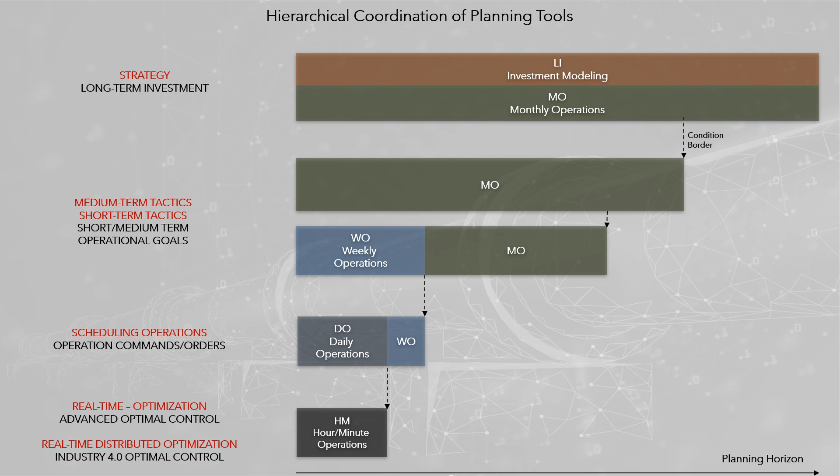From the point of view of mathematical modeling, hierarchical levels are intertwined and coordinated through the boundary conditions in time, and common modeling that can be shared. The modeling strategy of HAI is that all models of a decision support system can communicate with each other.

HAI Oil meets all the software solutions developed by HAI in different areas of application of mathematical optimization models, oriented to planning and to scheduling operations, in different business of the petroleum product supply chain.

Oil Enterprise-Wide Optimization integrates mathematical models for each of the links in the oil supply chain, in such a way to manage the planning of the supply chain with a holistic vision.

The design of HAI Oil EWO was the result of work done for a multi-business oil company. The union of models, and their coordination, forms the hypothalamus of an oil enterprise.

The current computational power allows detailed modeling of the supply chain, considering individually all the systems that compose it. This allows visualization of all the existing bottlenecks, and those that affect the maximization of economic gains.

All models developed by HAI, to support decisions in the oil industry, are interconnected through an information system. In this way the construction of the artificial hypothalamus is a question of joining the equations that make up the different models.

Oil Transport Systems Optimization corresponds to a general model, common to all types of oil products: raw, refined, natural gas and biomass, which represents the process for a specific system, including particular equations when this is required. It considers 2 types of transport modes: pipes and multimodal vehicles, like vessels, barges, train tanks, and/or truck tanks.

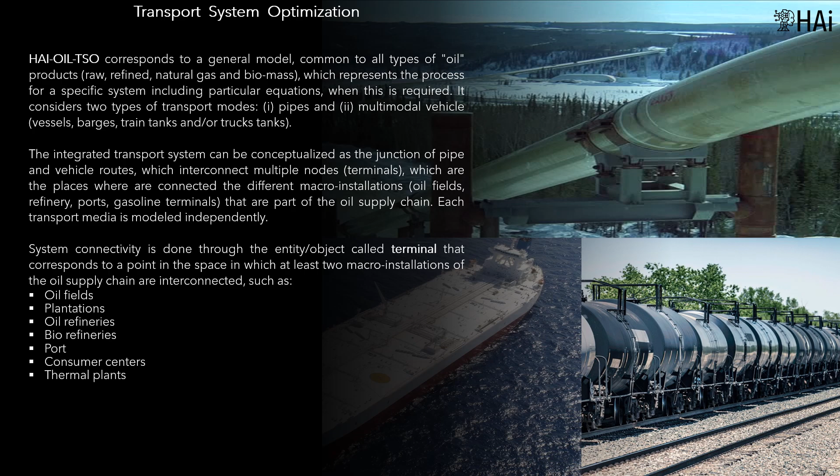Prescriptive analytics. To optimize are required the following models: the operation, dispatch, of the pipeline, at least one or two days in advance. This implies a real-time operating model, whose planning horizon is divided into periods of hours, fractions, which can be redispatched at any time, and the transport of hydrocarbons in relation to nomination, DRA dosage, energy consumption month by month.

This implies a short medium-term tactical operating model, whose planning horizon is divided into periods of weeks, fortnights or months, and that serves to adjust the pumping program, prior to the dispatch of the polyduct.

It is considered that the appropriate methodology for these models is mathematical programming, also known as exact methods. The other optimization alternatives are discarded for not being exact; they may produce unfeasible solutions, and they don't guarantee getting the optimal solution - they leave money on the table.

The results of the models, mainly the real-time ones, must feed the databases of the SCADA system, or distributed control. The image presents the IT architecture of the proposed solution. The mathematical models will be analyzed later. The methodology involves linking predictive and prescriptive artificial intelligence methods, to give rise to decision-making artificial intelligence.

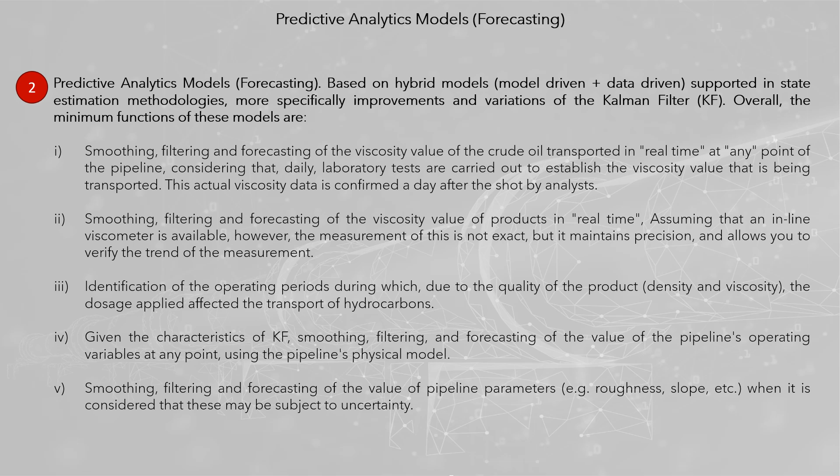Given the characteristics of KF, smoothing, filtering, and forecasting of the value of the pipeline's operating variables at any point, using the pipeline's physical model, and smoothing, filtering and forecasting of the value of pipeline parameters, e.g., roughness, slope, etc., when it is considered that these may be subject to uncertainty.

As a general rule, it is considered appropriate to use an extended Kalman filter, or a dual Kalman filter, to simultaneously estimate state variables, and the parameters of the equations.

Data-based algorithms only consider the database of observations, historical or synthetic, to determine the dynamic prognosis of the physical process. Normally, the related professional is a data scientist.

Model-based models are based on the numerical simulation model, which must be fitted by means of algebraic expressions, to be expressed as a system of stochastic differential equations, or finite differences, or finite elements. This requires an expert in the field of interest, in this case fluid mechanics, mainly in the transport of petroleum products.

The integration of the two approaches gives rise to hybrid predictive analytics, which can be considered as the appropriate method, that takes advantage of the mathematical knowledge of the physical system, and historical information. The most well-known method, and most used, for more than 65 years, is the Kalman filter.

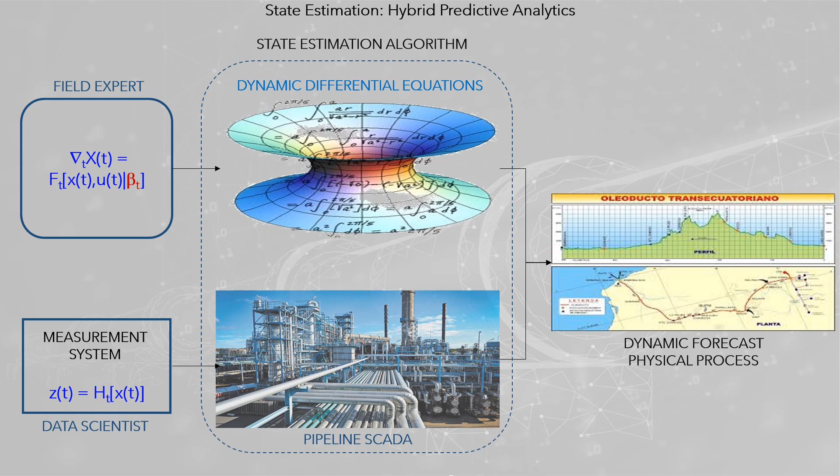The state estimate describes the system based on state variables, characterized by discrete, empirical probability distributions, and dynamic, empirical probability distribution functions that evolve over time.

Forecasting, predictions about the future, and filtering, predictions for the present. In a system under uncertainty, correcting the past may be just as important, if not more so, than forecasting the future and estimating the present.

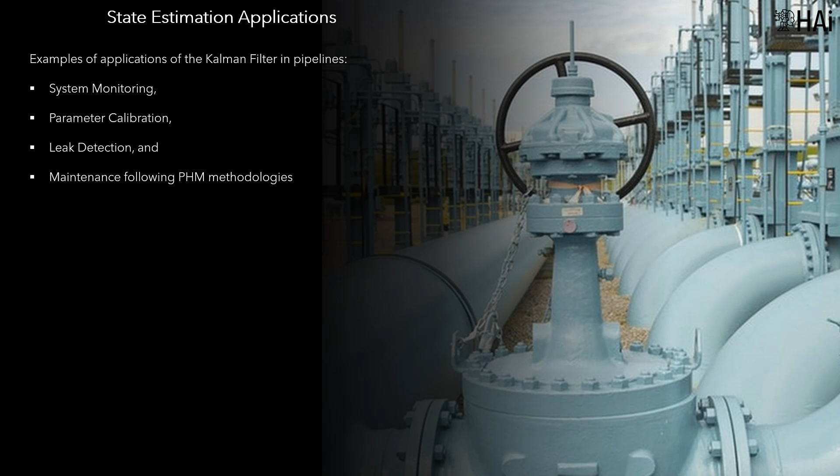Examples of applications of the Kalman filter in pipelines are system monitoring, parameter calibration, leak detection, and maintenance following PHM methodologies.

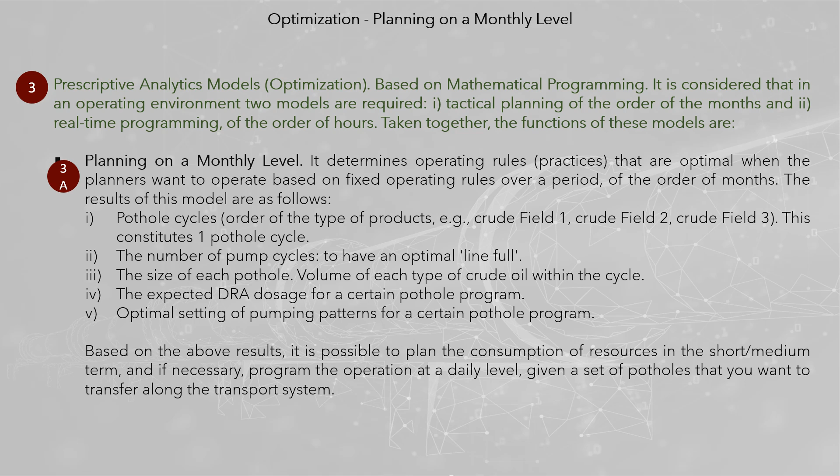Based on the above results, it is possible to plan the consumption of resources in the short-medium term, and if necessary, program the operation at a daily level, given a set of potholes that you want to transfer along the transport system. Daily scheduling determines the optimal operating conditions for a planning horizon of the order of days.

Specifically, it is expected to define operation schedules up to 3 or 4 days in advance. The results of this model are as follows.

Pumping plan at each pump station, optimal pump configuration pattern for the pump stations, and RPM at each pump. Contribution of DRA at injection points in each period of the planning horizon, and the flow and pressure variables along the pipeline, which can be visualized in the pipeline digital twin.

The two models share equations and processes and differ in the specific characteristics of monthly tactical and daily real-time planning. The objective function of the models may vary according to the criteria of the decision maker, such as minimize cost of operation, minimize energy consumption, and maximize oil products transfer.

The models, together or individually, can be used to support other decisions related to the operation of the transportation system. For example, supporting the ATP (available to promise) decision to accept or refuse transport of operational volumes for customers who request it without having a prior agreement.

To solve the mathematical problem of optimizing prescriptive analytics of a system, several approaches can be used: mental models, intuition and goodwill, simulation (physical model plus human reasoning), meta-heuristics, smart rationing, machine learning, experiences, best practices, and mathematical programming (physical model plus optimization mathematics).

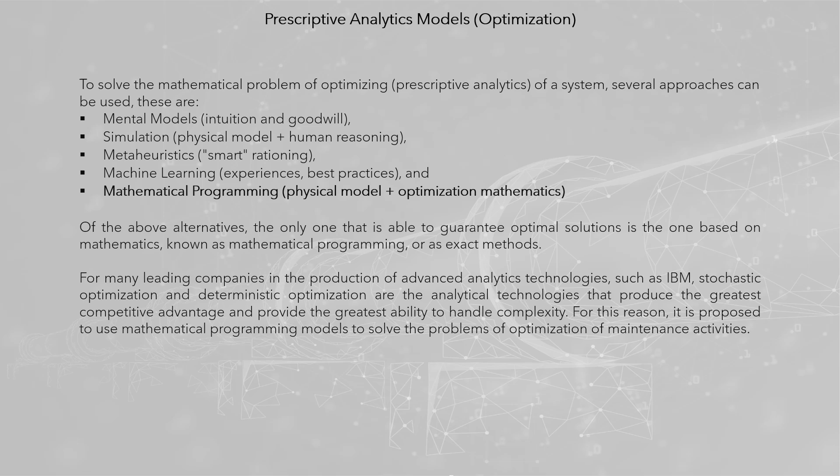Of the above alternatives, the only one that can guarantee optimal solutions is the one based on mathematical programming. For many leading companies in the production of advanced analytics technologies, such as IBM, stochastic optimization and deterministic optimization are the analytical technologies that produce the greatest competitive advantage and provide the greatest ability to handle complexity. For this reason, it is proposed to use mathematical programming models to solve optimization problems.

In decision-making, artificial intelligence mathematical programming may be considered the best of the breed. Pipelines planning and scheduling: compared to other transportation modes like road, railroad and vessel, pipelines are the safest and most economical way of conveying petroleum products over long distances, day and night.

During the last 2 decades, the operational multi-product pipeline scheduling has gained increasing attention. The problem of optimization of pipelines involves safe, reliable and economical operation, in which, for each moment of the planning period, the flows, pressures and configurations of the pumping stations must be determined, according to the different types of products that must be transported through the pipeline network.

The goal of the operation moves between 2 criteria: minimize energy consumption, an environmental criteria important to preserve the sustainability of the planet; and minimize the cost of energy, an economic criteria important in energy markets where rates change throughout the day.

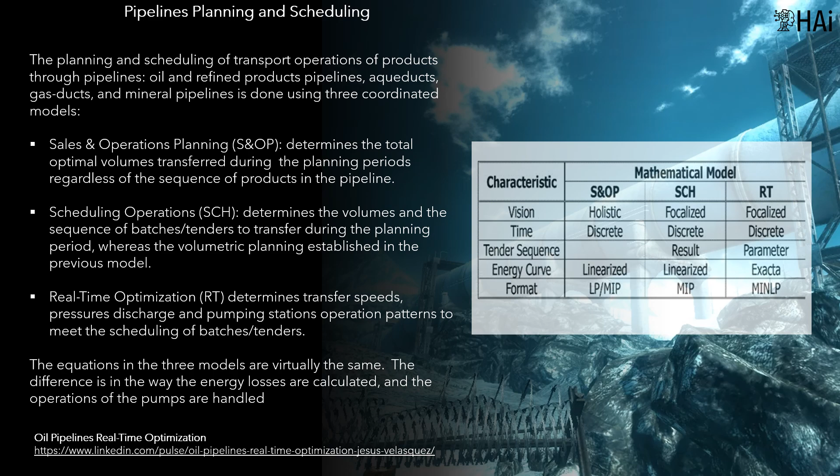Discrete time and continuous time modeling. There are two alternatives for modeling operations scheduling: discrete time models and continuous time models.

Continuous time modeling coordinates and details the beginning and end of all activities that are part of an operations plan. The conceptualization of modeling is generic, in the sense that it can be applied to any programming of detailed operations of a production system. The effort in modeling is greater than in discrete time and is less known by mathematical modelers. Its direct application is real-time models.

Discrete time modeling divides the planning period into periods, usually of equal duration, and determines the average conditions in which the production system must operate. This modeling is better known, and traditionally is used for tactical planning. If greater precision is required in the results, the duration of the periods must be decreased, which increases their number, which entails problems of greater dimensionality.

Any of the above methodologies may be useful in solving real problems. The suitability of its use is determined only after a detailed analysis of the matrix structure of the optimization problem is performed.

The real-time models include nonlinear modeling that determines the amount of energy consumed based on the flow of products in the system. In aggregated models, when multiple types of products can be transported in the pipeline, the total transport time must be divided into the time used to transport each type of product at different transfer rates.

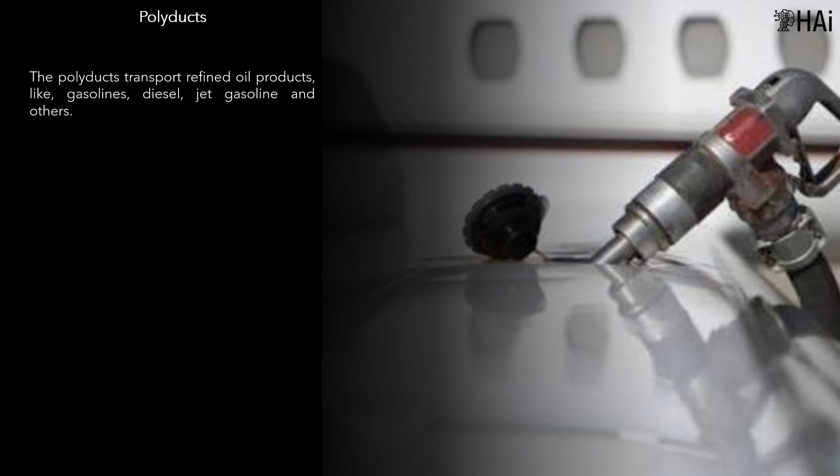Three types of pipelines exist: oil pipelines, which transport crude oil from oil fields and ports; polyducts, which transport refined oil products like gasolines, diesel, and jet fuel; and gas pipelines, which allow combustible gases, natural gas, and liquefied petroleum gas, to be transported on a large scale and over a long distance.

The optimization mathematical models for pipeline transport systems can be used with one of the following objective functions: minimum power, minimum cost, and maximum flow.

Optimization strategy. The problem-solving methodology must speed up the optimization process. The chosen method is based on problem breakdown for the different periods that make up the planning horizon.

The synthesis of the behavior of pumping stations by means of a convex hull for variables that synthesize their optimal operation as a function of pressure P and flow Q, for a given type of product associated with the batch, and coordination of the optimal solution using a Lagrangian coordination scheme.

The purpose of this is to iteratively solve significantly simpler problems that allow the original problem to be solved in significantly shorter computation times. After several analyses and numerical experimentation with mathematical models that represented the detailed problem, the following design principles are reached in order to make the solution of the problem viable as specified.

Split and decompose the problem into multiple problems of lower dimensionality in order to obtain the solution based on an iterative process. Maintain the format of the problems as linear or quadratic to take advantage of solvers specialized in this type of problem, and perform pre-processing of information in order to accelerate the solution of the problem, offloading unnecessary repetitive calculations from the optimization model.

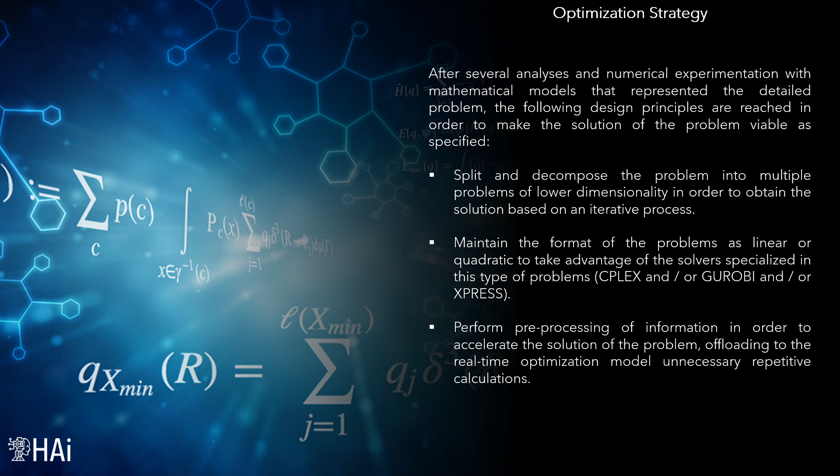Pumping stations modeling. In the oil industry and other industrial processes, pumps are divided into two general classifications: variable head pumps, or centrifugal, and positive displacement pumps.

Variable head pump types include centrifugal and turbine pumps, while positive displacement pumps include reciprocating and rotary pumps. The screw pump is one of the commonly used rotary-type pumps in the oil industry, and is mainly used in low-flow operation, where the efficiency of a centrifugal pump would be very low.

On the other hand, the versatility in handling high-pressure heads makes the centrifugal pump the most used in industrial applications. The effect of a pump on a system is to increase total energy.

The action and operation of a pump is defined in terms of its characteristic curves. These curves relate the capacity, or flow, of the pump, in volume units per unit of time, versus the discharge pressures. The equation that represents this ratio is obtained from the characteristic curve of the pump, which is provided by the manufacturer.

This curve is generated for a pump rotation speed and for a characteristic viscosity of a reference product, usually water. This implies that, to determine the coefficients of the actual pumping curve, it is necessary to adjust the coefficients of the characteristic curve, based on the viscosity of the fluid that is pumped.

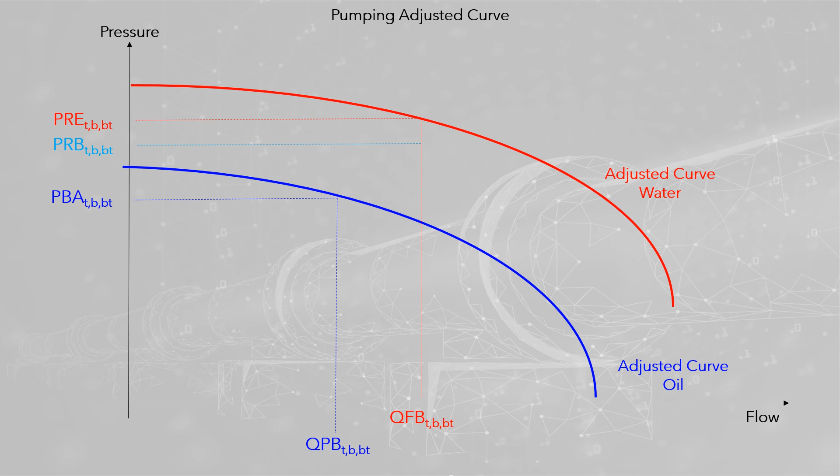If the pump rotation speed changes, adjustments must also be made to determine the actual operating conditions of the pumping station. When a defined flow is required, and knowing that the system curve varies, it is necessary to affect the pumping curve, and thus find a new point of operation that meets the flow and pressure needs for the system.

The relationship is exponential, implying diseconomies of scale in energy consumption as a function of flow. In theory, the pump has no limit in flow, but for an infinite flow rate, it would require infinite energy.

On the other hand, it is normal that there is a minimum flow rate so that the pump begins to operate. The curves depend on the product transported. To the extent that it is heavier, denser, more power is required for the same flow. This applies to petroleum and petroleum products, that is, the curve depends on the API grade.

A pumping station is composed of multiple pumps, usually of the same type. While the atom of the system is the pump, it is necessary to analyze the behavior of the station as a machine, whose function is to pump a product to a certain transfer rate, and at a given pressure.

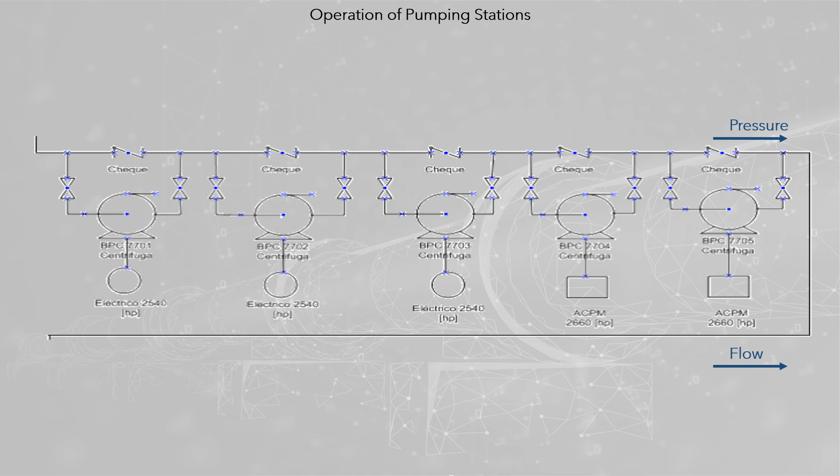The pumping curve is determinant of the operation of the pumping stations. A way to affect the pumping curve is by setting up a pumping pattern, at a pumping station where there are multiple pumps. Configuration shapes are 2: in parallel, and in series.

When more than one pump is configured in parallel, the system receives higher flow rates, the sum of the individual flow rates of the active pumps, at the same pressure level. When 2 or more pumps are configured in series, the system receives greater pressure, the sum of the individual pressures of the active pumps, at the same flow level.

There are multiple operating patterns to configure the pumps of a pumping station. Its discrete character implies that selecting the more convenient one corresponds to a combinatorial mathematical problem. An aspect to consider is related to the type of pumps and the operating restrictions of pumping systems.

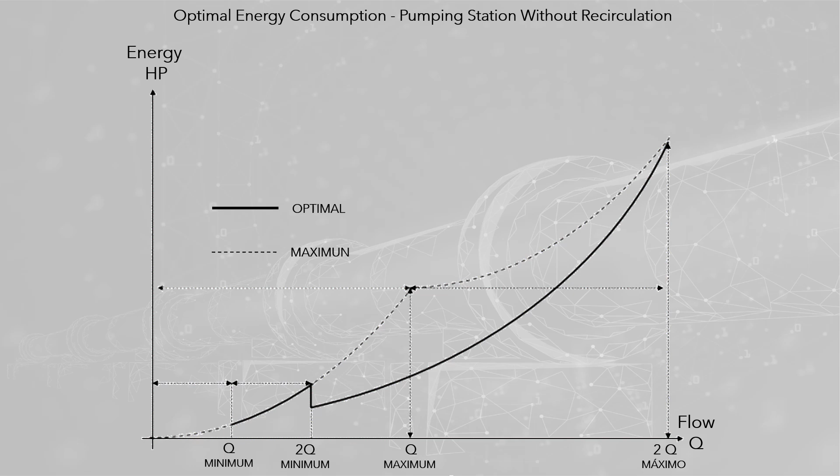If the pumps are operated in sequence, as much energy as possible will be expended. This behavior involves a discontinuity in the optimization model which must be handled carefully.

The behavior is different with fixed pumps, as they cannot regulate the minimum flow rate, and must lose energy in a dissipating valve, that allows excess energy to be released. The 2 cases involve non-convexities in the optimal consumption curves.

The graphic shows the optimal energy consumption versus flow rate for the station pumping heavy oil, for the 30th station pumping heavy oil.

It can be noticed that the flows that force the ignition of a new pump generate a discontinuity in the curve. This complicates the solution of the problem, since for such flows, the curve has 2 values. A fundamental aspect of optimization models is the definition of the feasible zone. In most problems this is not complicated.

The graph presents the feasibility zone when the operation pattern is in parallel. The graphic shows the feasibility zone of 20 pumping stations, operating in parallel, pumping mix oil.

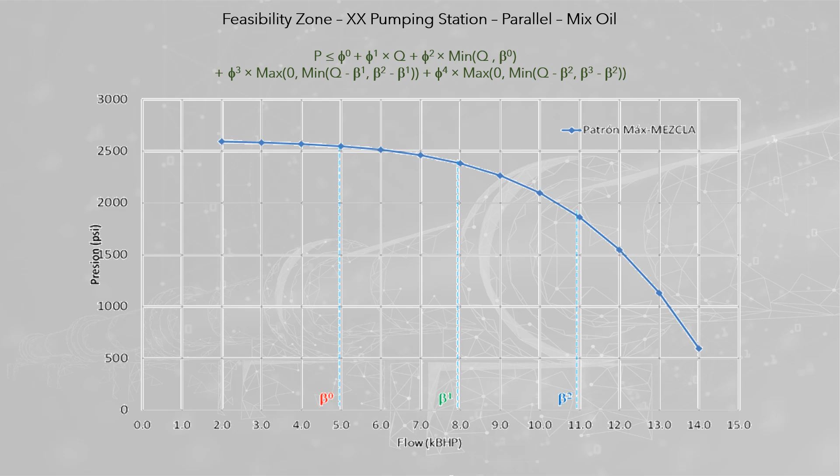Given the non-trivial form that gives rise to calculations, to represent the pumping feasibility area, the pump curves can be replaced by an algebraic function based on parameters, estimated through a least squares model. The polynomial function, or directly the empirical function, may be approximated by a piecewise linear function. For each pattern and product, the feasibility zone is linearized, based on the hyperplanes that support the continuous feasibility zone.

The graphic shows the feasibility zone of 20 pumping stations, operating in parallel, pumping mix oil. Now, the graph includes the linearized feasibility zone for pumping heavy oil. It is easy to notice that the area of operation for pumping heavy crude oil is more limited than for crude mix. The graph shows the maximum limits set by the extreme pumping patterns, which are assumed to cover the remaining pumping patterns.

And it defines the non-convex feasible zone for the pumping station operation. If the restriction is viewed as disjunctive programming, it has two convex disjunctive zones, since the pumping pattern is parallel, or is serial, but not both. This seems to be the most appropriate, from the point of view of mathematical modeling.

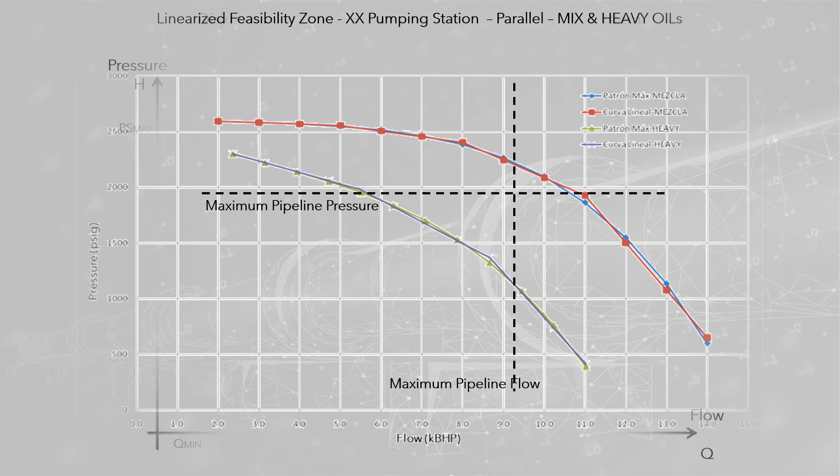The above feasibility zone must be intersected with the restrictions imposed by the pipeline, usually maximum limits on flow and pressure. The graph includes the limits in flow and pressure, due to the pipe. The rectangle determines the feasibility zone for the pumping of mix oil. This indicates that the limitations in the pumping of mix oil are due to the pipeline.

In the case of heavy oil, there are limitations due to the pipeline, and due to the pumping station. The operation of a station is determined by the following decision variables: pump configuration, in series or in parallel; engine speed, RPM; and flow rate and pumping pressure.

The configuration of the pumping stations is a central part of the decision-making process as, depending on the pumping pattern, the combined action of the patterns makes it possible to meet the flow pressure demand in multiple ways. The optimization requires a detailed hydraulic model, at the level of each type of pump used in the pumping system, and for each type of product being pumped.

Considering the integral optimization of the entire pipeline, using large-scale optimization methodologies, partition and decomposition, the operation of each pumping station must be optimized through a mixed integer linear programming model, MILP, that minimizes the amount of energy required to dispatch a batch QP, for each type of oil.

Associated with each point of the grid, the following data is stored in an optimization database: the optimal consumption, the operating pattern that produces it, and the dissipated pressure in the valve, unused available energy, and the RPM of the variable speed motors.

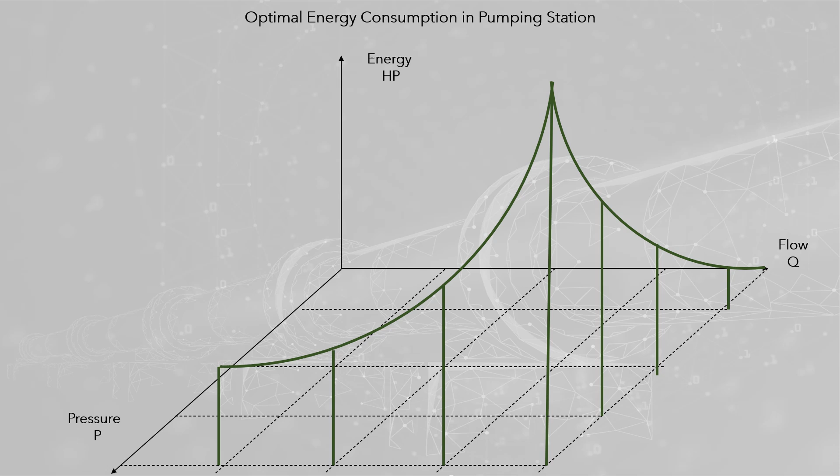The problem of determining optimal energy consumption in a pumping station is a relatively simple problem, but complex to solve, due to its combinatorial character.

The image shows the grid of optimal operating policies for any pumping station of the system. To build it, the flow and pressure are discretized, and the problem of optimizing the operation of the pumping station, for each QP pair, for each product that flows through the station, is solved.

To obtain a continuous solution, a convex linear combination is used, based on the 4 points that limit the polygon to which the solution belongs. It is an approximation. This process works well for the case where all 4 points use the same pumping pattern. If this is not the case, it should be analyzed how to resolve the situation.

The grid corresponds to a hull, convex or non-convex, which represents the optimal solutions of the operation of the pumping stations, as a function of the product, the pressure and the flow. If the envelope is convex, its incorporation into other models generates linear constraints. If it is non-convex, it implies the inclusion of binary variables, and will generate an MIP problem.

The integrated optimization of pipeline systems requires that all the pumping stations must be considered jointly. For real systems, it becomes a highly complex mathematical problem. For this reason, it must be faced using large-scale optimization methodologies, based on the partitioning and decomposition of the problem.

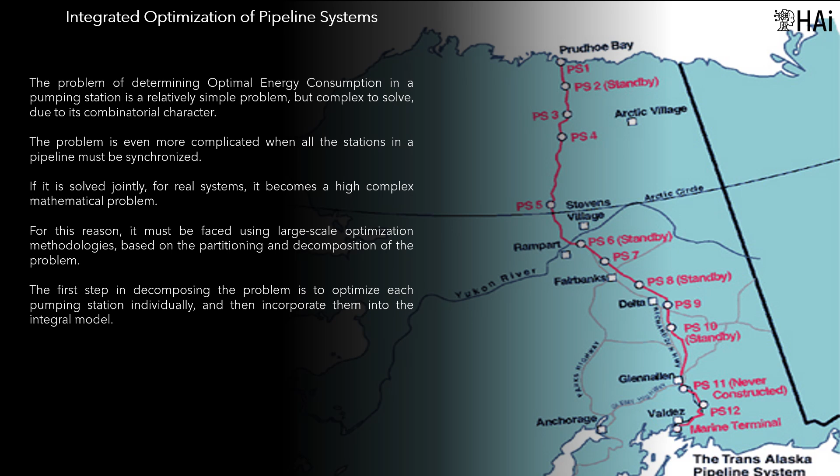The monolithic approach for oil pipelines optimization seems to be an impossible way, since the combinatorial character of the problem can make it impossible to solve in reasonable times.

The first step to the decomposition of the problem is the generation of the convex hull of all pumping stations. This process involves extracting from the monolithic model the model of the pumping stations. Using this model, convex hulls will be produced.

The results of the process must be stored in a database for later use in the pipeline system optimization model. The integral model must incorporate the equations that allow working with the convex hull to determine the flow and pressure for each product that flows through the piping system.

The process of generating the convex hull can be done offline, prior to the use of the optimization model. If the APIs of the products are constant, as in the case of refined products, the convex hull can be used for multiple runs of the optimization model. When it changes frequently, new convex hulls must be generated as products with new APIs appear, as is the case with crude oil.

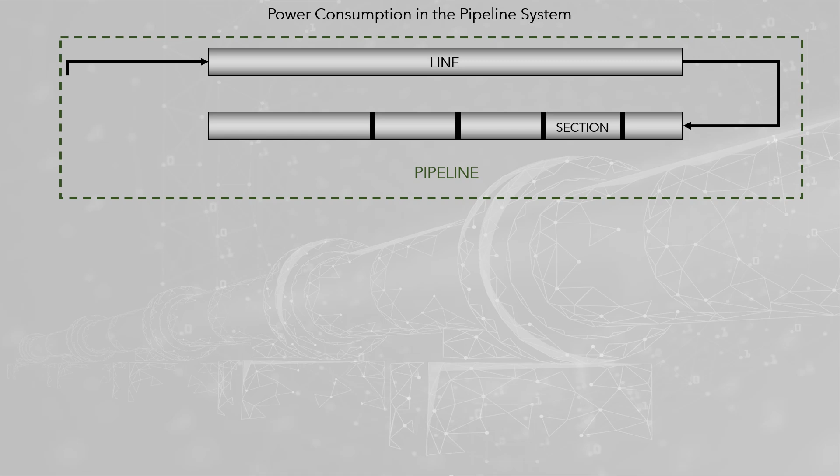Pipelines energy modeling. A pipeline consists of sets of lines. The lines join two main nodes of the pipeline: pumping stations, and product terminals where there are storage tanks. Lines are composed of sets of sections that join nodes. Each section has its own physical characteristics: slope, rugosity, thickness, length. The main nodes are characterized by the industrial infrastructure located on the node. All nodes are linked to a geoposition in the terrain.

The batches begin to flow along the first section of one line of the pipeline, and must therefore be linked to the line through which they enter the system. The matter and the energy continuity equations must be met on all sections and nodes.

The above concepts should be related to the operation of the transport system, using variables that determine for each period the position of the batch, which may be occupying several sections of one line, or several lines. The possibility of shutdown of the system, non-operation, zero flow, or of a pumping station, is also considered as a decision in the model.

In general, the study of pressure loss in a duct system indicates that there are three effects that produce the pressure drop: friction, gravity and acceleration. The most important effect for the behavior of pressure losses is that of the operating flow, which must be added to the pressure losses due to gravitational action and friction, which depend on the density and viscosity of the fluid. The acceleration effect in many cases is assumed to be negligible.

As fluids of different characteristics, viscosity and density, enter the pipe, the work to be performed for transport changes, represented by the required pressure. This can be viewed graphically using the pressure loss representations as a function of the flow, called system resistance curves. These curves reflect the behavior of the pumping head required for a given flow rate.

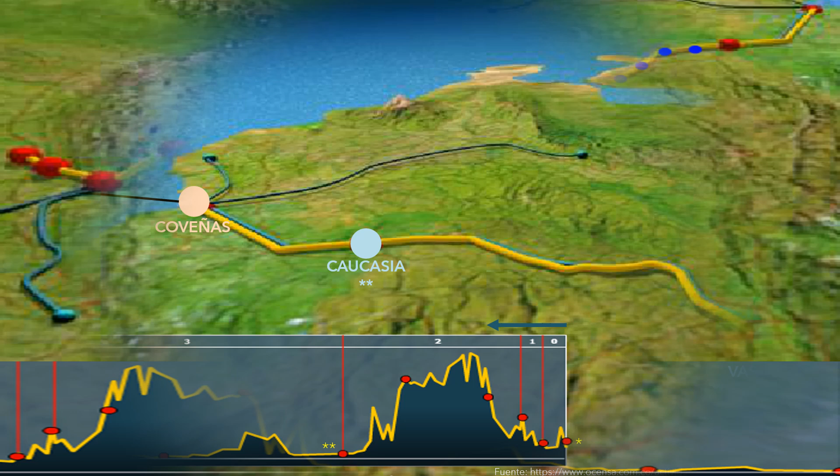The pipeline height profile is a determinant of the energy required to transport a certain volume of a specific product, at a certain transfer rate.

The energy losses in the sections depend on their characteristics, the type of product, and the transfer rate, or flow. They are independent of the profile of the pipe. Energy losses as a function of flow are exponential.

The energy generated by the pumping stations provides the energy required for the transport of the products, to the extent that the energy that is in the pipeline is consumed. The energy profile in the pipe must always be positive, so that the product can flow.

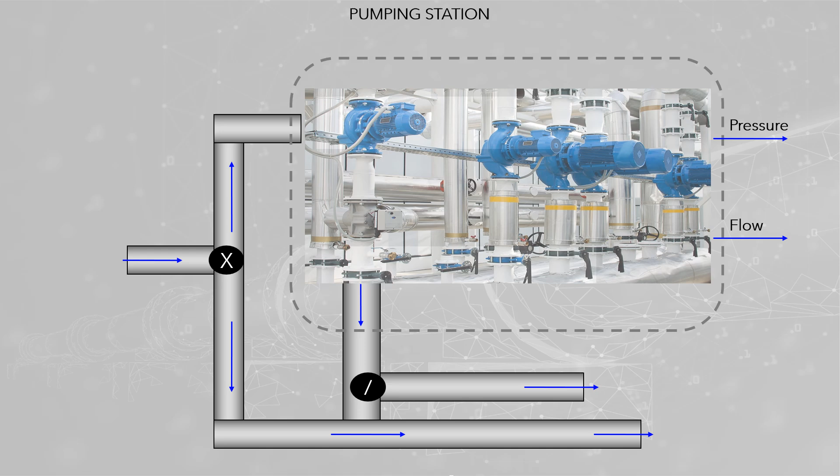Integration: the modeling of pumping and pipeline flow. There are multiple topologies to connect the pumping system to the pipe system. For real-time operation, this connection is very important. For tactical planning, it is less important, and may be approximated.

Optimizing batches sequences. The objective of modeling is to determine the sequence of batches that should flow in the pipeline. For discrete time models, the result is a matrix, sections by periods, which indicate the batches that occupy each cell of the matrix.

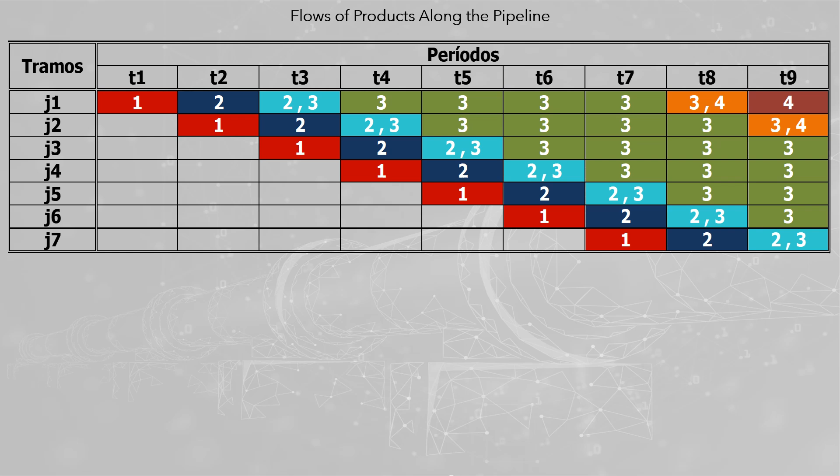This implies that the mathematical model must establish the energy loss curve of the mixture, considering the operation of the pipeline, as presented in the diagram. Experiments conducted by HAi indicate that a linear combination, weighted by the volume of each product, is appropriate.

Optimizing batch sequences. The batch sequence optimization problem is complicated by its combinatorial character, with precedence constraints. Precedence restrictions reduce the domain of combinatorics, since they do not allow all combinations. This facilitates the solution of the problem but leads to greater complexity in modeling.

An example of this type of constraint is one that does not allow a product of lower quality and cost, like kerosene, to go in the batch previous to a product of high quality, like jet gasoline. This prevents contamination of products. These problems are of the MIP type, and can be solved by mathematical programming, or by constraint programming. HAi has selected to work with mathematical programming.

Temperature impact optimization. Impact of temperature in pumping oil products. Due to seasonal variation, the average line temperature may change in time and space. As shown in the next images, viscosity of crude oil is a strong function of API gravity and temperature. This affects the amount and cost of energy, and the transport capacity. At very low temperatures the system may stop operating.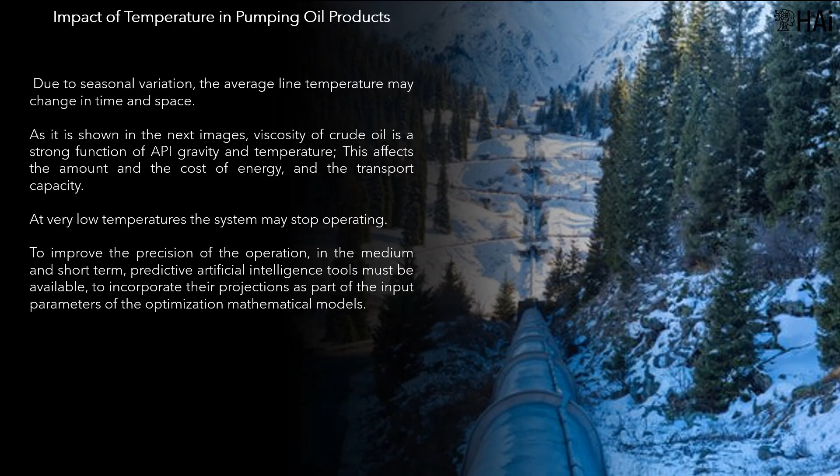Variation of crude oil viscosity with API and temperature. The figure shows that oil viscosity decreases as temperature increases. Lower viscosity results in higher Reynolds number, therefore the friction factor decreases.

Effect of temperature on total pump power requirement. The analysis indicates that for an oil pipeline, the pumping power requirement varies as the crude oil degrees API changes. Increasing line average temperature reduces the crude oil viscosity. The reduction of viscosity results in higher Reynolds number, lower friction factor, and in effect lower pumping power requirements. An 8 degree Celsius temperature difference can imply about 25% difference in energy consumption.

This impact is not limited to pipelines, it also affects production fields.

Drag reduction optimization. Drag reduction is a physical phenomenon that causes friction to be reduced, and fluid flow to be increased. Chemicals that reduce drag are known as drag-reducing agents, DRA. Several polymeric compounds can reduce the wall shear stress of flowing liquids at low concentrations. Thus, the use of DRA has the following advantages.

Increased pipeline capacity, the throughput. Savings in pumping power. Pressure reduction with associated reductions in pipe thickness, and pressure surge, and reduction in pipe diameter in the design phase, as well as the number or size of pumping facilities.

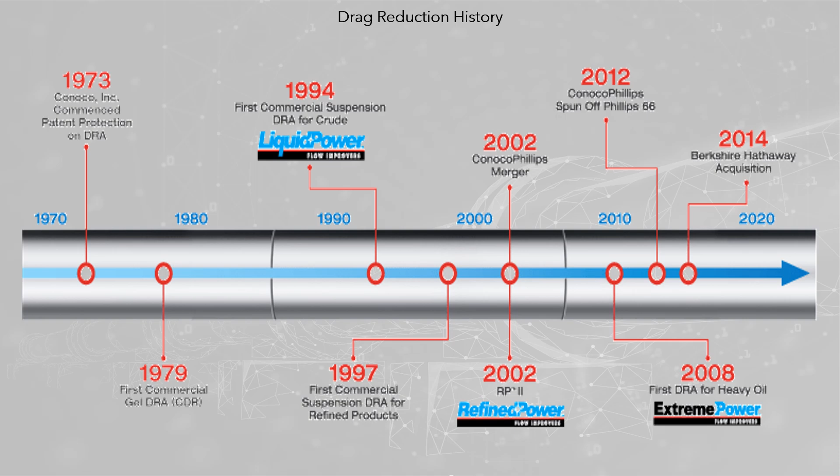This drag reduction optimization involves an empirical, experimental process to determine the variations in operating conditions, pressure and flow, considering the conditions of the pipeline and the pumps, and the impact on the operation of the concentration in weight, and volume, of the type of DRA used.

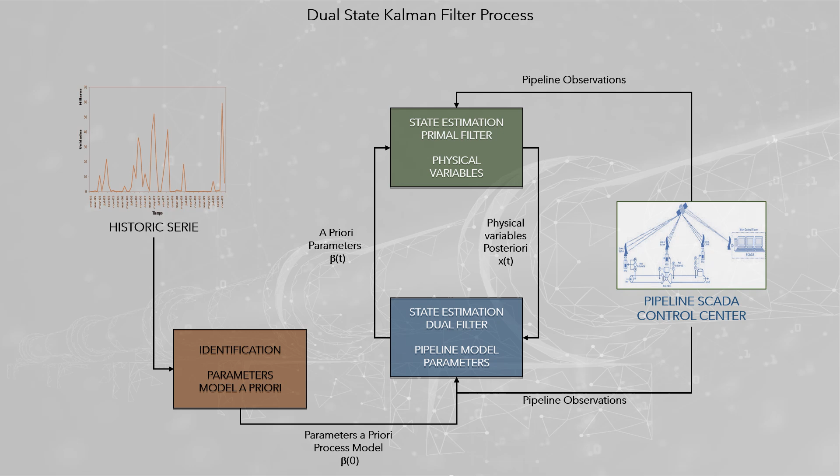To do this, a model of the pipeline, a digital twin, must be built considering the theoretical mathematical equations of the flow, and validate them with controlled measurements, using a model supported by artificial intelligence. HAi suggests a model based on the dual-state Kalman filter. The image presents the connectivity of a state estimation model, as part of the DRA function parameter estimation process. This is because there are no exact equations for its description.

The benefits of DRA optimization are: increase pipeline throughput, reduce energy of pump stations, reduce pipeline flow friction, reduce carbon emissions, reduce operation pressure, save energy costs, increase technical and economical productivity, and increase transport capacity, then avoid construction and expansion of pipelines.

Pipeline digital twin. The concept of the digital twin is associated with cyber physical systems, and provides an innovation that will bring a new look to industrial automation.

However, the basic concepts of digital twins are old and date back many years, in which models of differences and finite elements were used to build simulators of industrial or natural processes that would serve to support decision-making, and to validate the knowledge that we have of the process of reference.

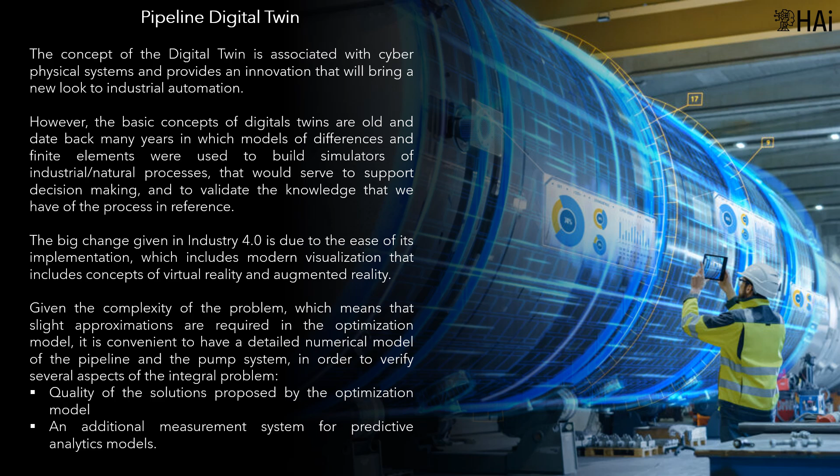The big change given in Industry 4.0 is due to the ease of its implementation, which includes modern visualization that includes concepts of virtual reality and augmented reality.

Given the complexity of the problem, which means that slight approximations are required in the optimization model, it is convenient to have a detailed numerical model of the pipeline and the pump system, in order to verify several aspects of the integral problem: quality of the solutions proposed by the optimization model, and an additional measurement system for predictive analytics models. The image presents the connectivity of a digital twin to support the state estimation and optimization models.

In the past, HAi has built, in Excel, pipeline simulation models that maybe support the digital twin of an oil pipeline. Politic tactical planning. HAi framework.

The following graphic, taken from Rejowski and Pinto, 2005, illustrates the problem of planning politics, which has two fundamental aspects: sequence of batches, and hydraulic conditions.

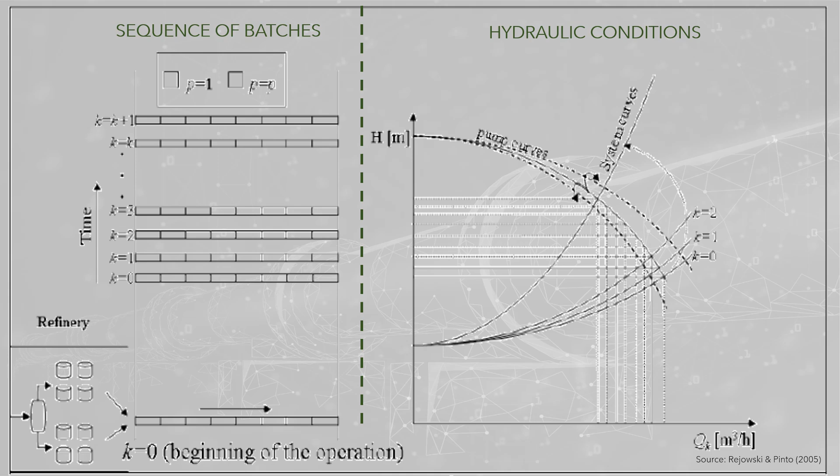Along the polyduct, the planning of a polyduct aims to determine goals, not transport orders, for the transportation of oil refined products in the medium term, that is, in the order of weeks or months.

The results sought are defined goals for the sequence of batches to be dispatched, and define their technical specifications: volume, transfer rates, and DRA injections.

The time period of departure and of arrival of batches. The level of inventories at each terminal linked to the pipeline system. The operation plan of the pumping stations, and the minimum cost of the operation of the system.

The complexity of the problem of programming the sequence of batches in a polyduct is evident, since it corresponds to a combinatorial problem that involves binary variables to coordinate the assignment of sequences to the different batches, which defines a MIP problem with NP-hard complexity.

If the transfer rate is considered as a variable, the problem will become a MINLP problem, which further complicates its solution. Three fundamental aspects must be considered in modeling: the nonlinearity that is generated in the movement of the batches,

the nonlinearities in the pumping stations, which may be non-convex, and the rules that must satisfy the sequence of batches of the different products. Not all combinations are allowed.

HAi's criterion is to maintain the model as a MIP optimization problem. In the movement of fluids in the pipeline system, the fundamental nonlinear equation defines that time of the displacement is equal to the volume transferred divided by the flow rate.

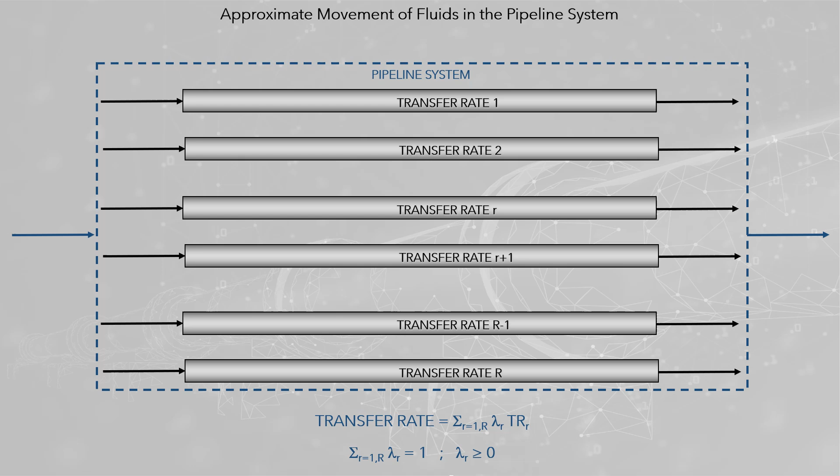The lambda multipliers represent the fraction of the time during which the line operates at the associated flow. The approximation must be made for each line and applies to all sections that are flowing in the system during period t. This approach is appropriate when speed is required to obtain an approximate optimal solution, near to the real optimal solution.

It is the case of tactical planning, but it is not the case of real-time scheduling. The HAi proposal for pumping station operations is to model the pumping system using a convex hull, calculated offline, which corresponds to a linear model.

For those parts of the pumping operating system which involve discontinuities, and therefore nonlinearities, it is suggested to make approximations which guarantee convexity. Planning based on previous experiences.

Discrete formulation of continuous process. Due to multiple limitations that existed in the past, for example, limited computing capacity, optimization algorithms in the process of growth, lack of knowledge of high-performance optimization methodologies, and difficulty formulating complex math problems.

Approximate models were generated based not on an exact mathematical formulation, but aimed at selecting one, or a combination of solutions, proven, whose greatest quality is that they guarantee feasible solutions. For those old years, that was a wise way to face the problem.

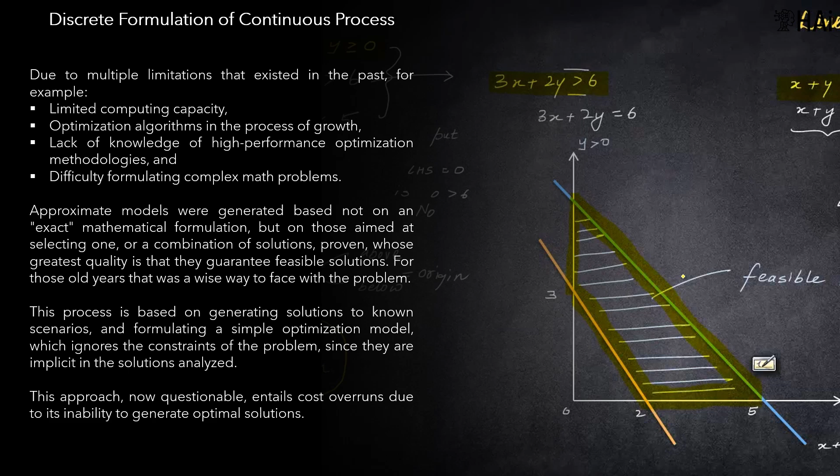This process is based on generating solutions to known scenarios, and formulating a simple optimization model, which ignores the constraints of the problem, since they are implicit in the solutions analyzed. This approach, now questionable, entails cost overruns due to its inability to generate optimal solutions.

To analyze the impact of this approach, consider that the green shaded zone represents the real feasibility zone of a continuous process. If a discrete formulation is used, that is, discrete solutions are assumed for continuous variables, the real feasibility zone will be reduced, affecting the optimization, so that the profits provided by the model will be seriously reduced, being able to reach zero.

In the case of using a single solution, there will be no optimization, and the feasibility zone will be reduced to the point of the formula used.

In the case of using two solutions, the feasibility zone will be reduced to the line that connects the two points that represent the formulas used. The solution shall be a point on the line that determines the convex linear combination of the two formulas.

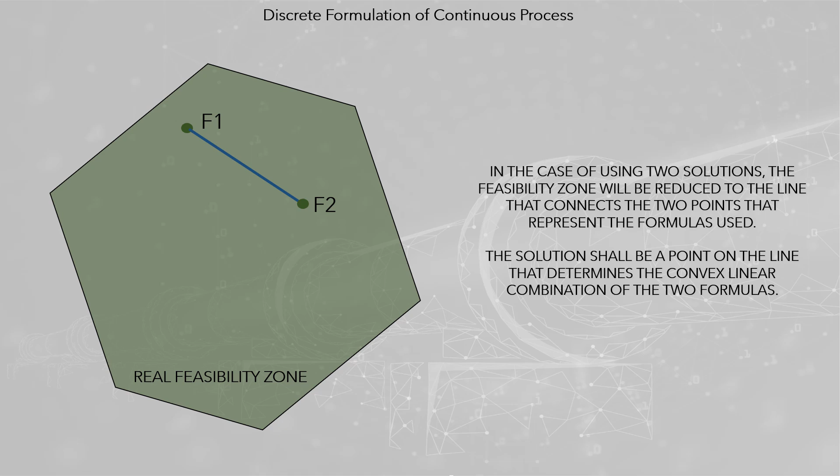In the case of using three or more solutions, the feasibility zone will be reduced to an area delimited by the points associated with the formulas. The solution will be a point inside the modeled feasibility zone, which can be expressed as the area containing all the convex linear combinations of the formulas used.

To the extent that discrete solutions are incorporated, the modeled feasibility zone will approach the real feasibility zone. The quality of the approximation depends on the coverage made by the discrete formulas of continuous space, something similar to what happens in the design of experiments.

A greater number of points does not provide more information if they fall into the area defined by the convex linear combination, defined by the extreme points of the historical sample. No more points are required, more coverage is required.

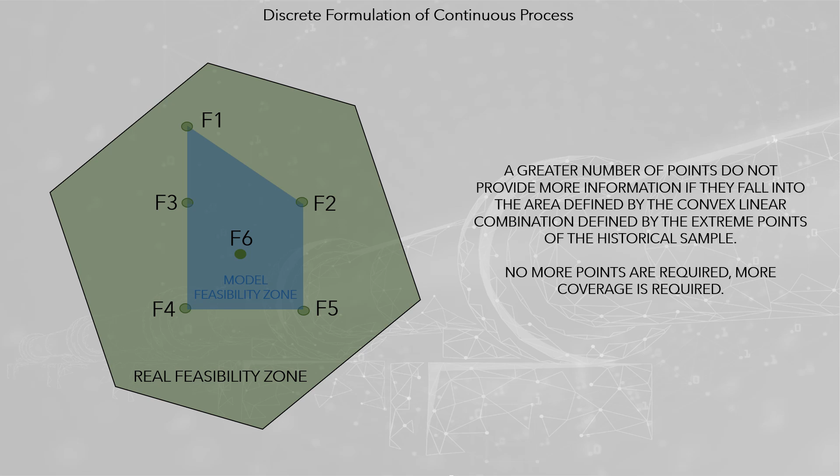In any case, the representation based on discrete formulas generates suboptimization, due to a smaller feasibility zone than the real one. There are large-scale optimization methodologies, such as Benders theory, which starting from an approximate feasibility zone are forming the real feasibility zone, to achieve the optimal solution.

In this case, the solutions that should be incorporated are generated by an artificial intelligence based on mathematics, and not on the practices, or the mental models, of humans.

In concrete terms, suboptimization implies lower ROI captured by mathematical models. Saving a little money in mathematical complexity but leaving important money on the table. It is a bad business.

Case: optimization of scheduling of multi-product pipeline and depot inventory. The following is the summary of the paper, Simultaneous Scheduling of Multi-Product Pipeline Distribution and Depot Inventory Management for Petroleum Refinery.

The scheduling model consists of three submodels: a pre-processing submodel for regulating new feeding pipeline slugs, a TM handling submodel, and a product pipeline distribution submodel with consideration of depot inventory management. The MPD DIM could handle the mixed interface of oil products appropriately and economically through blending and distillation operations. Meanwhile, the optimization of multi-product pipeline transportation and depot inventory management could be simultaneously accomplished.

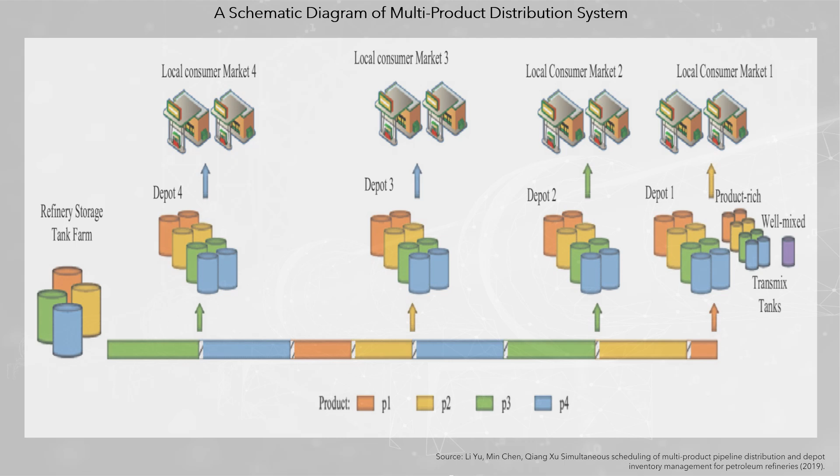The efficacy of the methodology and MPD DIM model has been demonstrated by 6 case studies. The image shows a schematic diagram of multi-product distribution system. Continuous time modeling corresponds more to a scheduling model than to a planning model.

The integrated planning of a pipeline system that links different streams in the oil chain is the central part of the enterprise-wide optimization of an oil company. For a petroleum products transportation company, its business may be to efficiently transport petroleum products. But it can become more profitable, not to transport them.

This is related to the definition of which is the product that is transported and marketed: oil and derived products that are physically transported, or the technical specifications that are transported in the products.

Natural gas transport is a good example. All natural gases have different energy content. What is used in thermal power plants is energy. Natural gas is a medium that contains energy. Commercial agreements are made on quantities of energy, and not so much on volumes of gas.

The technical, commercial characteristics of the product depend on the type of oil product that is moving along the pipeline, and the blending of these products in the terminals of the pipelines.

It could be the case of moving a product to a terminal, to complement the technical specifications of the existing products in the terminal, mix them and deliver them to the customer, depending on the commercial transaction.

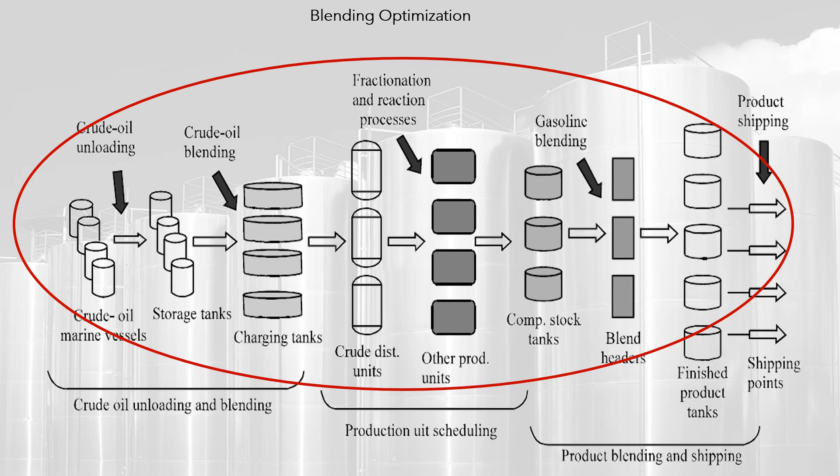The model blend allows to plan transportation operations for multiple oil production systems, with a view to delivering crude oil blends to refineries and/or ports that are connected to the system. The system accepts any type of connectivity topology between facilities.

The supply of oil is given through fields producing different types of crude oil, with a predefined availability. This offer can be defined dynamically, considering the evolution of the oil-producing fields' operations plans. It is also possible to consider buying crude oil in the spot market.

The demand for commercial crudes occurs in refineries and export ports. It is possible to buy crude oil in the spot market, in order to mix them and obtain new commercial oils. It can also be considered purchases or sales of oil futures, which must be respected.

The purpose of optimization is to determine the optimal operation of the system, in such a way as to maximize the utility produced, or to minimize the costs of satisfying a predefined demand.

A terminal can be conceptualized as a machine that takes multiple oil crudes, mixes them, and produces multiple blended crudes. There are also, at the end of the refinery, terminals oriented to handle the finished products and their blending. The image presents an example of the blending equations.

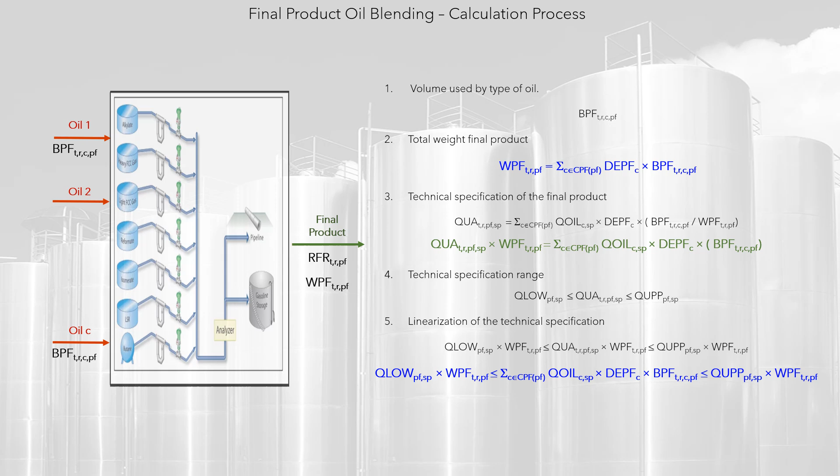The features of this system are: oil is produced in the production fields, each field being characterized by the type of oil it produces. Such oil must enter the oil distribution system that feeds export ports, through which commercial commitments to sell oil in the spot market, or the financial markets, or directly to the refineries.

Optimizing the blend of crude oil and petroleum products is a multi-million-dollar application. It can be coupled to the production of oil fields, in such a way as to establish optimal plans for production, distribution, export and import. In addition, blending processes extend to petroleum products, for example, lubricants.

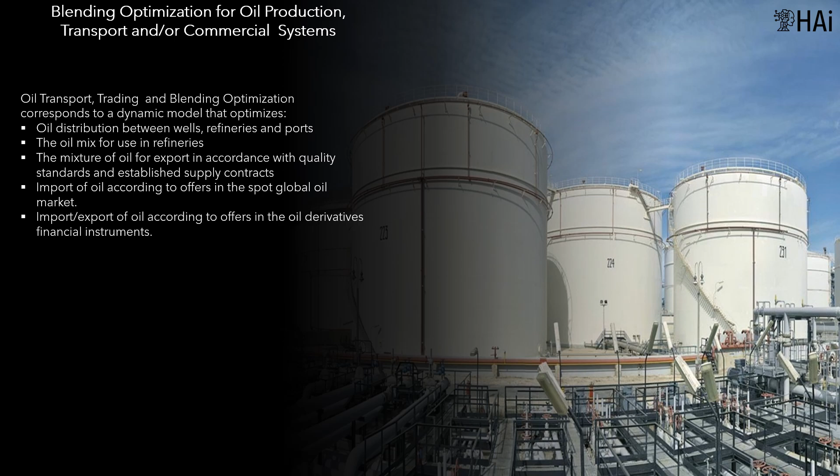Reducing quality target variance should be at the top of the list for refinery improvements. Deviations from quality targets should be minimized, to charge the pipe still with a steady mixture of crude oil. Steadier quality crude oil mixtures charging the pipe stills will also translate into steadier operations for downstream production units. It also makes good sense to run pipe stills with a constant flow rate for as long as possible.

Hypothetical benefit calculations. Total yearly savings in American dollars: quality target variability improvements such as whole crude oil sulfur, 2 million; reduced chemical injection, 100,000; distressed sale of crude oils from the refinery, 325,000; pipeline penalty charge for changes in sequence or timing, 75,000; spot opportunity for crude oil trades, 250,000; and reduced working capital, 100,000. Total year: 2,850,000.

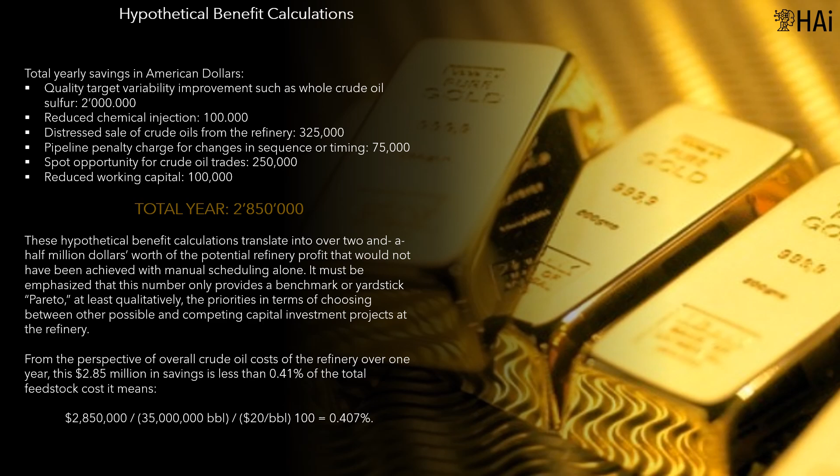These hypothetical benefit calculations translate into over $2.5 million worth of potential refinery profit that would not have been achieved with manual scheduling alone. It must be emphasized that this number only provides a benchmark or yardstick to prioritize, at least qualitatively, the choice between other possible and competing capital investment projects at the refinery. From the perspective of overall crude oil costs of the refinery over 1 year, this $2.85 million in savings is less than 0.41% of the total feedstock cost.

Oil and gas pipelines nominations and bilateral contracts. The nominations are the agreements made by the carrier and dispatcher to transport oil, natural gas, and petroleum products, using pipelines.

This process normally occurs within a long or medium-term contract between the transporter and the dispatcher. In turn, the contract of the dispatcher, who can be a distributor or a large consumer, is backed by contracts with end customers.

This process determines the demand for transport services that must be attended by the transport system operating company. Short glossary: Nomination, a request for a sender's transport service. Nominated quantity refers to the volume that the sender requests to be transported from a point of receipt and delivered to a certain point of delivery, for a period of nomination. This must be authorized by the carrier.

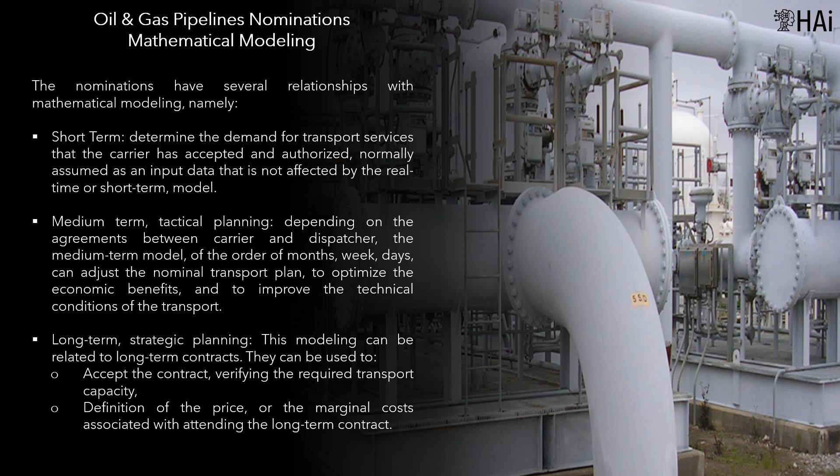They can be used to accept the contract, verifying the required transport capacity, and definition of the price, or the marginal costs associated with attending the long-term contract.

At the end of the last decade of the last century, Oil Express, a global natural gas company that operated several natural gas producing fields in multiple countries, asked HAI for support to define a natural gas field exploitation planning strategy, using highly complex mathematical models to analyze the entire decision-making environment. The challenge was to develop a model that supported the decision-making regarding the exploitation of natural gas fields and its impact on Oil Express finances.

Oil Express: Natural Gas Field Exploitation Planning, in 1997. Analysis of the gas market for the electricity sector. The main study carried out with HAI-POWER was the analysis of the national gas market for the electricity sector. This is due to no alternative markets for natural gas other than national electricity generation.

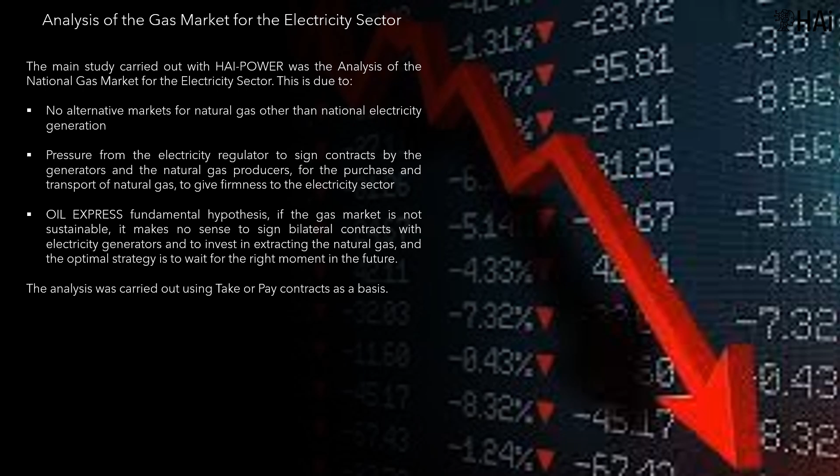Pressure from the electricity regulator to sign contracts by generators and producers of natural gas, for the purchase and transportation of natural gas, to give firmness to the electricity sector. Oil Express's fundamental hypothesis: if the gas market is not sustainable, it makes no sense to sign bilateral contracts with electricity generators, and to invest in extracting the natural gas, and the optimal strategy is to wait for the right moment in the future. The analysis was carried out using take-or-pay contracts as a basis.

The take-or-pay, TOP, is a contractual clause requiring the buyer to take the delivery of a specific amount of goods or services from the seller, or pay a fine if they do not. Thus it protects the seller against potential losses if the buyer refuses to complete the purchase by a particular date. A TOP clause is common in energy industries, including oil, natural gas, mineral, and coal, seeking significant investment.

Fuel supply contracts directly affect dispatch. In general, a contract has the following components: a percentage of the maximum consumption is purchased in the take-or-pay mode, the surplus over the take-or-pay is purchased under the pay-as-you-go modality, and there is a rolling period to consume the take-or-pay part.

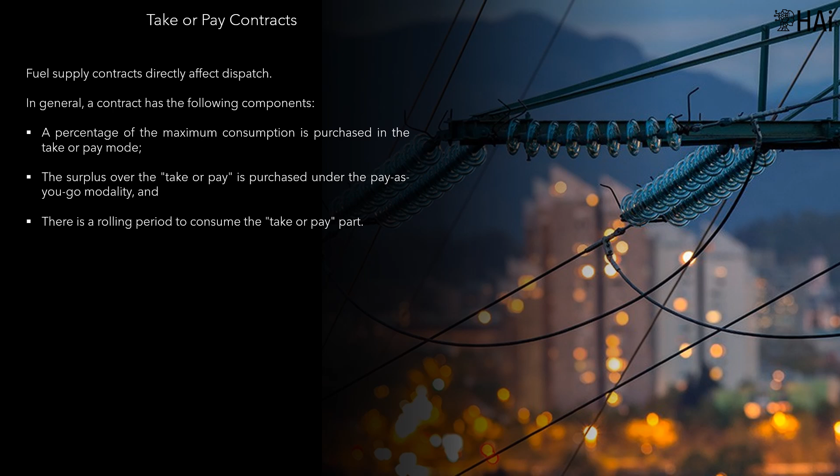Given the seasonality of prices in the electricity sector, the model included TOP with a rolling period, which gives flexibility to the buyer to accommodate their physical purchases, but it complicates the generator's decision-making process.

10 plants were considered for take-or-pay contracts with an installed capacity of 2,813 megawatts. The take-or-pay percentage was 30% for the plants of the center and 70% for the plants in the border, and the electricity dispatch planning model used by the ISO operator was adapted to represent the impact of TOPS.

The chain of qualitative effects which derive from top contracts is relatively easy to foresee. The bid price of the thermal plants to the spot market will go down, because they have turned the variable cost into a sunk cost. In the extreme, it could reach zero. This will lead to an increase in the dispatch capacity of thermal plants, and the fall in spot prices.

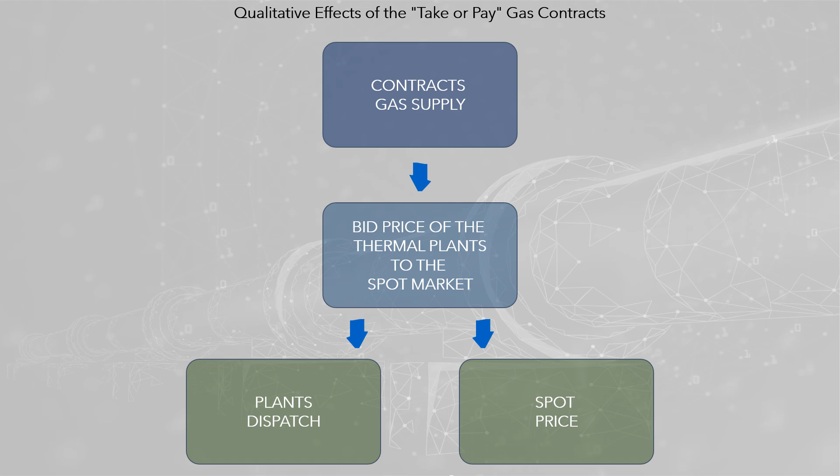But quantitative effects are not intuitive, they can't be calculated with an Excel spreadsheet. As the volume of natural gas contracted through TOPs increases, it can be expected that hydro plants will lose share, thermal plants will gain participation, and the spot price will go down.

It is clear an economical resource, but not 100% reliable, hydroelectric energy, is being exchanged for another more expensive but more reliable, thermal energy. It should be considered as a risk premium.

From the point of view of income, revenues from hydro generators will decrease, and the change in the income of thermal generators cannot be evaluated a priori. Therefore, a mathematical model is required to evaluate quantitatively the natural gas market.

Modeling take-or-pay contracts. To carry out the study, 5 cases were implemented to consider the top modeling. The following is the code associated with the modeling and description. No top, no contracts. Libre, optimized contract generation.

Equations are included in the dispatch model, HAI-POWER, to accurately represent top contracts.

Rodante, minimum rolling generation. The minimum generation of the thermal plant is forced during the rolling period, to ensure compliance with the contract. Mensual, minimum monthly generation.

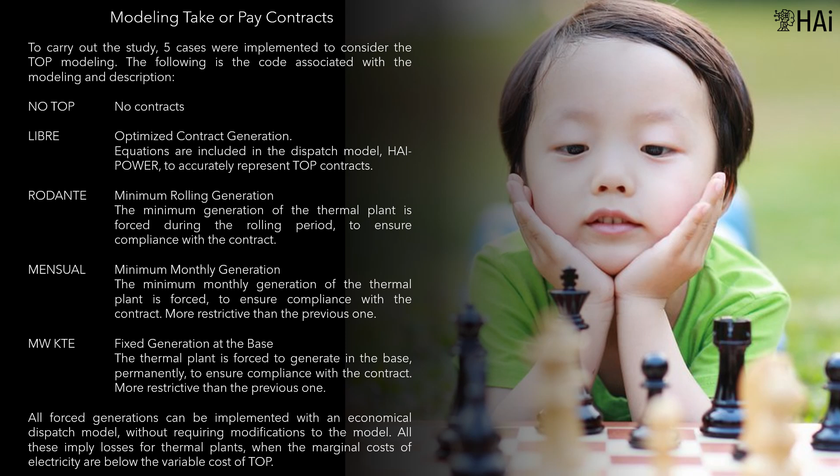All forced generations can be implemented with an economical dispatch model, without requiring modifications to the model. All these imply losses for thermal plants, when the marginal costs of electricity are below the variable cost of top.

Top contract modeling implies dividing the thermal generation into GT0, thermal generation with cost equal to variable O&M costs excluding fuel cost, Type 0, limited by top contract, and GT1, thermal generation with cost equal to variable O&M costs plus fuel cost, Type 1, non-top contract. GT, the total thermal generation, must be equal to GT0 plus GT1.

There is only one appropriate way to study top contracts, and in general any bilateral contract: model the operations and the financial transactions as they are described in the contract. Approximations to this modeling will only bring economic losses for the generators and for the society.

For example, trying to adapt an economic dispatch model by parameterizing the dispatch of thermal plants will bring negative consequences for all market agents. All forced generations can be implemented with an economical dispatch model, without requiring modifications to the model. But all these imply losses for thermal plants, when the marginal costs of electricity are below the variable cost of top.

To quantify the financial impact of take-or-pay contracts, we can consider the estimated operating income for generators, defined as the marginal cost, a proxy of the spot price, multiplied by the generation.

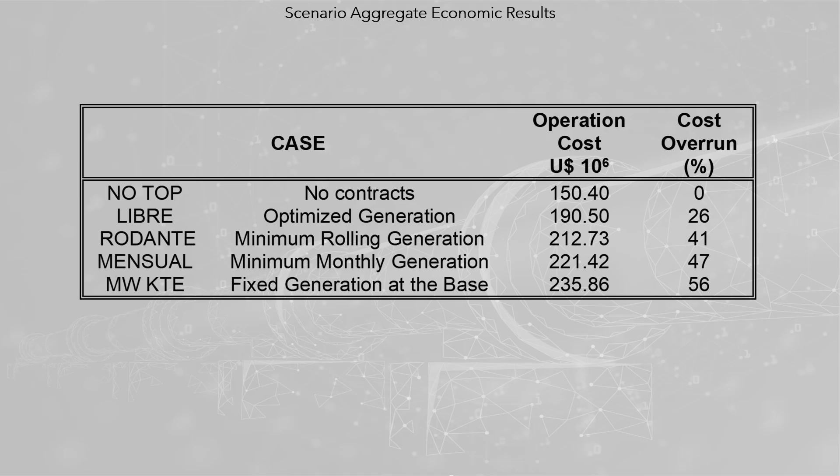It must be interpreted that if we implement low quality models, this will translate into more expensive operations, which will pay someone in the market. The first candidate is the user of the models.

The effect for hydraulic generators, which generate less and receive less remuneration for each MWH generated, the negative effect is evident.

For thermal generators with tops, the increase in generation could produce a higher operating income. The impact can be summarized as: tops contracts as proposed adversely affect the aggregate of all generators, and when mathematical modeling practices are incipient, this will negatively affect the market.

A good way to present the financial information is the accumulated curve of estimated operating income over the entire planning horizon. The graph shows operating income of hydraulic generators. These graphs present the aggregation of all generators, but they exist for each individual generator as well.

In the case of this hydro generator, paradoxically its financial health does not depend on its own actions, but on those of other agents. If thermal generators assume a rational position, the financial health of the hydro generator will not be affected. But if they assume an irrational position, ignoring mathematical laws, the hydro generator can go bankrupt.

In simple terms, this defines an undesirable externality in a market, in which the errors of one agent can be paid by other agents. The golden rule is: everyone pays for their own mistakes and takes advantage of their right decisions.

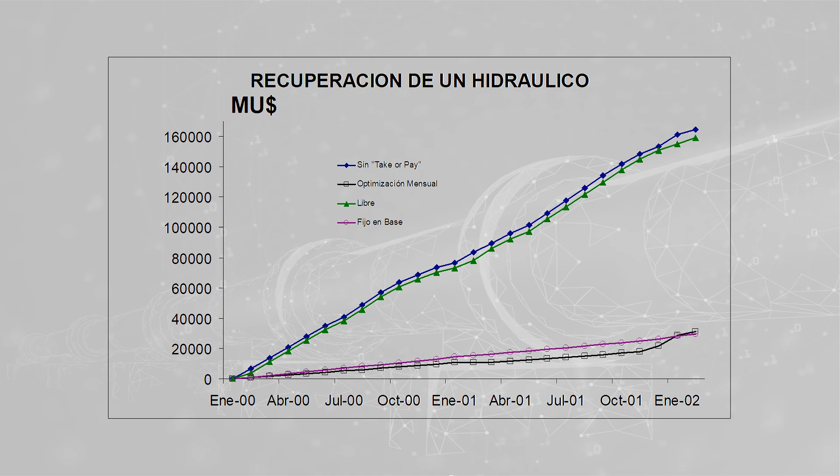The situation of thermal generators is different. For the planning period analyzed, the costs of tops contracts cannot be recovered. The financial damage will be greater if the decision handling is not based on specialized mathematical management models.

HAI-POWER allows Oil Express to financially analyze all market participants, both potential customers and clients of the competitors, which allows Oil Express to perform scientific market intelligence activities.

Considering that the proposal of tops made by government entities does not come from an optimization process, but were defined considering logic and good practices, HAI and Oil Express proceeded to make an adjustment in the value of the tops, so that they approached an optimal value, and thus analyze the behavior of the market in these conditions. These adjusted values do not come from an optimization process. However, it should be noted that the HAI-POWER model can be used to determine optimal top values.

The graph presents the comparison of the results for the cost recovery of hydraulic generators.

Values set based on mental rules can affect the market, even bankrupting it. It could be concluded that the greatest damage that can be done to the market is to establish reference values without justified mathematical support.

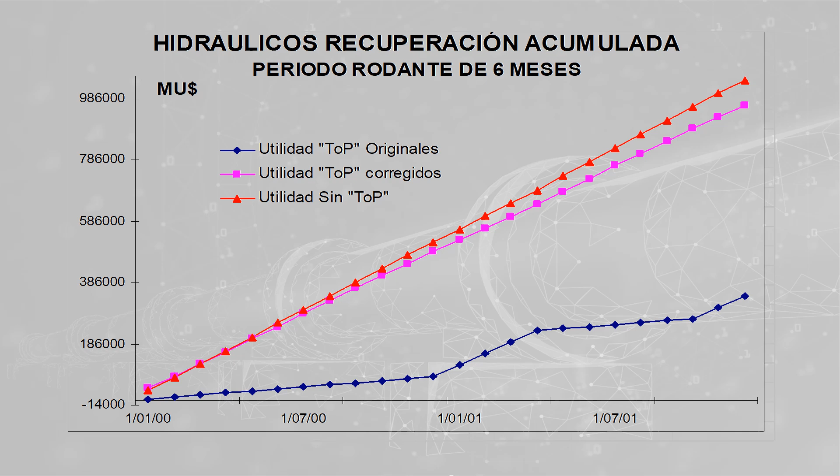Since there are values of the tops that minimize the values of the risk premiums for reliability, without profoundly altering the economic behavior of the market, it is coherent that if the thermal generators act rationally, they do not drastically affect the hydraulic generators as a consequence of their bad decisions.

In the case of cost recovery of thermal generators, the situation is more complicated, including because the optimal values for the tops will generate problems of bankruptcy and liquidity, which will be more serious if the top values do not have appropriate rationality. This indicates that the electricity market cannot guarantee that thermal generators can pay the tops contracts that are theoretically required by the government.

The model turned out to be correct, since in early 1998 it detected the market crisis between 1998 and 2000, which led to bankruptcies of thermal generation companies.

Successful decisions. For its part, Oil Express has proven that there are no market conditions, that is, there does not exist a good set of profitable thermal generators that can pay for gas through tops contracts, required to guarantee the extraction of natural gas. If it is a question of compensating the situation based on price, if Oil Express sells natural gas at high prices, it is possible that Oil Express must recover bankrupt industrial company assets. Everything seems to indicate that the optimal decision may be to delay the investment, waiting for a market with better conditions.

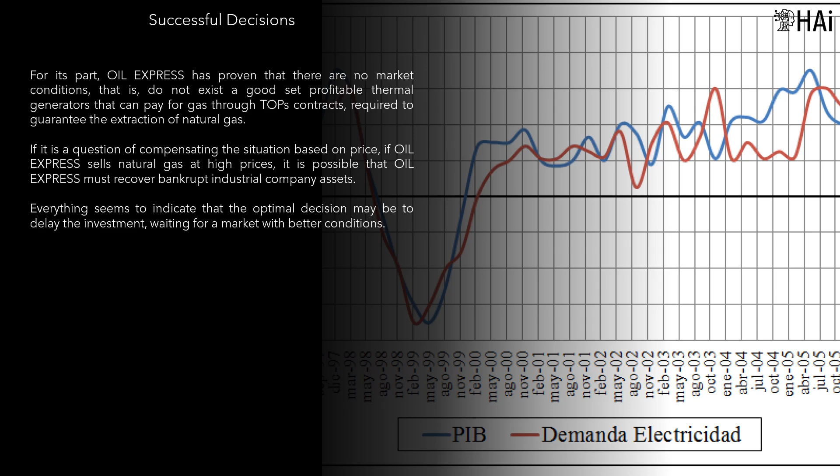Oil pipeline scheduling. The white paper Oil Pipelines Real-Time Optimization contains the detailed information about the model described in this section.

The work carried out by HAi is the result of the empirical analysis of multiple implementation alternatives for the solution of the problem associated with the optimal operation of an oil pipeline system, ensuring that the methodology implemented complies with certain requirements.

It must respect detailed hydraulic modeling of the pipeline system and pumping station system, manage electricity rate schemes differentiated by time slots, and cover a planning horizon of 72 hours of operation with a 10-minute breakdown.

The first version of the model ran on a personal computer in 2012.

The input data of the mathematical model includes lengths, diameters, thicknesses of pipes, mechanical strength, internal roughness, elevation profile of the lines, properties of main elements in each station such as pumping units, control valves, load curves, efficiency, stages, NPSH, BHP, and maximum and minimum pressures at various points.

Other inputs include energy costs, schedules, and where applicable self-generation and required fuels, a detailed transportation program for a maximum period of 72 hours, the default sequence of tenders and their volumes, delivery times, and physical properties of products such as density and viscosity.

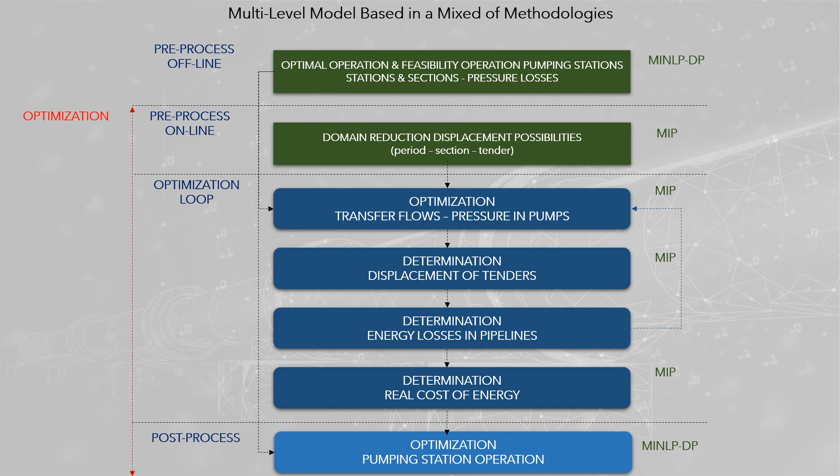A basic model in MIP format, with cyclic movements based on gradients, and a multi-level model based on a mix of methodologies. The strategy is based on 4 stages and 7 optimization models, which are solved using Lagrangian coordination methodologies.

The first stage is the offline preprocessing, which consists of 3 processes: 2-dimensional flow pressure surfaces, convex or non-convex hull, of optimal energy consumption, and the corresponding configuration at each pumping station, to meet a flow rate Q at a pressure P, for each type of crude oil.

Definition of the 2-dimensional feasibility zone, Q and P, of the operation in the pumping station for each type of crude oil, and definition of the detailed hydraulic behavior of friction and gravity pressure loss in the pipeline system. This information comes from the expert system, that stores the operating patterns of all pumping stations for all oil products.

The second stage is the online preprocessing, that focuses on the domain reduction of the possibilities in the pipes. It determines the possible batches that can pass through a section J during a period T. This reduces the dimensionality of the model, since only the feasible tender-section-period combinations are considered, and this preprocessing depends on the data of the run and must be done before starting the optimization process.

The third stage is the optimization loop. The optimization process is divided into 2 steps, to decrease the dimensionality of combinatorial problems. The first step has 3 sub-steps.

It ignores the displacement of the tenders along the system, and therefore approximates the friction losses in the sections in the different periods, which are calculated based on an estimated curve that is assumed to reflect the characteristics of the tenders passing through the section during a period.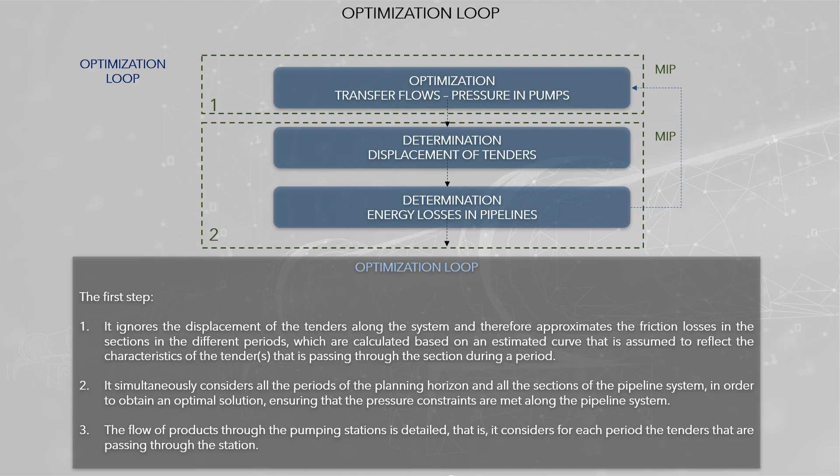It simultaneously considers all the periods of the planning horizon, and all the sections of the pipeline system, in order to obtain an optimal solution, ensuring that the pressure constraints are met along the pipeline system, and that the flow of products through the pumping stations is detailed, considering for each period the tenders passing through the station. The second step has 2 sub-steps.

It determines the displacement of tenders along the pipeline system, determining which tenders are passing through each section for each period, and based on that information, it determines the best curve of friction losses that represents what happens in a period for each section. This information is fed back to the first step.

The process of determining energy losses in pipelines corresponds to a separable process, and therefore can be solved in parallel for every period of the planning horizon.

Once the iterative optimization process has been stopped, the fourth stage is post-processing, related to optimization of pumping stations operation. It has two steps.

The algorithm proceeds to review, for each period and each pumping station, the optimal conditions of operation, according to the flow-pressure pairs established as optimal scheduling. It corrects the approximation generated due to the size of the grid used to linearize the optimal consumption in the optimization loop step, since during this process the problem is solved for exact values of the pumping plan, not for values of the grid limits.

The image shows the optimization loop flowchart.

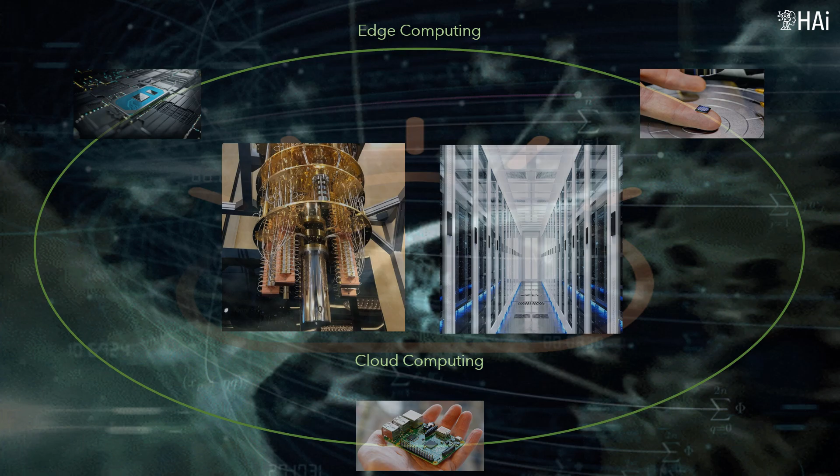Computational solution. The current state of computer technologies involves the integration of edge computing and cloud computing to implement systems with multiple highly complex mathematical models that can be run in parallel. The implemented solution involves two phases of computer operation.

Offline, it occurs when computers are not engaged in the optimization process and are dedicated to generating information that will be used on the next occasion that optimization is required. During this phase, tasks related to generation of convex hulls and generation of information related to predictive analytics methodologies are operated.

Online, it occurs when computers must meet the immediate demand for optimization processes. In this phase, computational resources are oriented to autonomous real-time distributed optimization, using in parallel large-scale methodologies to solve the problem.

The offline convex hull generation is a semi-automatic process, which must be performed when new products are going to be incorporated into the pipeline. It can be carried out in parallel, since each point of the grid can be optimized independently for each product in each pumping station.

However, the chain sequential optimization of a product in a station can take advantage of an optimization process that considers how the grid is covered.

The online optimization is a process that in its first part is not parallelizable. This is because displacement of all tenders are intertwined. The adjustment of the operation of the pumping stations is parallelizable, which can accelerate the final optimization when the number of periods of the planning horizon is large, that is, when the duration of the periods tends to zero. This is typical of optimal control models.

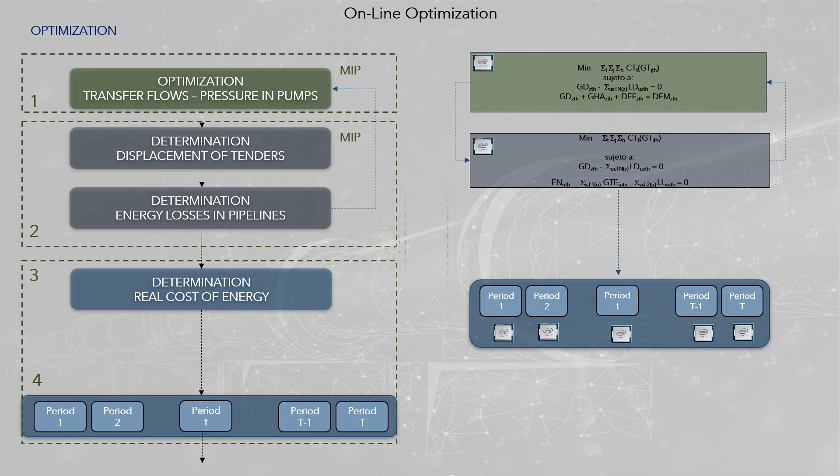All the processed information is stored in an expert system supported by a relational database that stores all the results of the optimization processes carried out.

The implementation of the models was realized using Optex Expert Optimization System. Optex is the HAi artificial intelligence that manufactures decision support systems for Industry 4.0.

To solve the problem, a set of GAMS programs were implemented. The main characteristics are basic solvers: linear mixed programming with IBM CPLEX, Gurobi, and Xpress, and nonlinear programming with CONOPT.

At the request of the end user, the system was implemented in an Excel interface, from which the operator performs programming and analyzes the results.

HAi has a solution accessing a SQL-type database, Oracle, DB2, MySQL, etc., and the results of the optimization model were validated by comparing them to a perfect model that represents the real operating conditions of the pipeline.

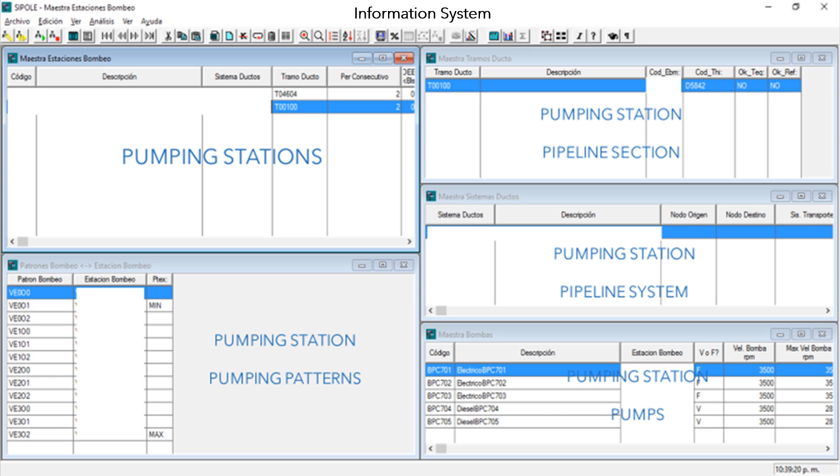Case: Oil Express Pipeline Real-Time Optimization. Description: The Oil Express pipeline is composed of 2 pumping stations and a maritime terminal, FSO terminal.

The crude oil is stored in tanks and then transported by the submarine pipeline to the floating oil storage unit for the loading of the tankers. PSO2 pumping station is in charge of giving more pressure to the 20,000 barrels of oil received per hour from the PSO1 station, which are then sent to the FSO maritime terminal.

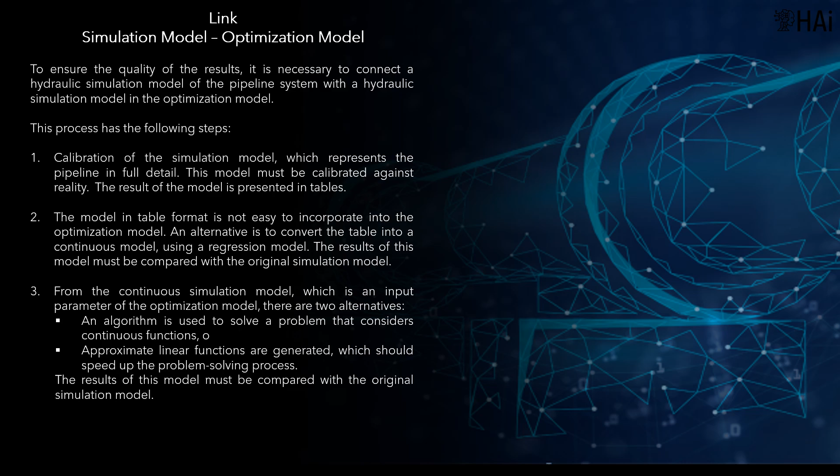To ensure the quality of the results, it is necessary to connect a hydraulic simulation model of the pipeline system with a hydraulic simulation model in the optimization model. This process has the following steps.

Calibration of the simulation model, which represents the pipeline in full detail. This model must be calibrated against reality. The result of the model is presented in tables.

The model in table format is not easy to incorporate into the optimization model. An alternative is to convert the table into a continuous model, using a regression model. These two models are run offline, and their results can be stored in the offline database.

The results of the pipeline's approximate regression continuous simulation model must be compared with the original simulation model. The main objective of the simulation model is to validate the accuracy of the hydraulic model, pumping stations and pipes, which will be used in the optimization model.

The optimization hydraulic model is solved online by the real-time optimization model. The main objective of the simulation model is to validate the accuracy of the hydraulic model, pumping stations and pipes, which will be used in the optimization model.

The table presents 4 of the comparisons made for pressure-flow pairs, for heavy crude oil, at the PS-01 pumping station. The mean error for energy consumption was 0.23%.

Case: Oil Express. List of variables and models.

The optimization process has been divided into 3 sequential stages, to solve the problem in parts, reducing as much as possible the process time required each time the models need to be run, to define a new pumping plan.

The 3 stages are: Pre-processing involves the analysis of information from the pipeline system, with a view to preventing the optimization model from repeating calculations that can be performed in advance, and whose results may be permanent, with the aim of minimizing the time to solution.

2 types of pre-processing are considered: offline, before starting the optimization process, to calculate parameters that are independent of the operating scenario; and online, before starting the optimization, but when the optimization scenario has been defined.

Optimization: every time a pumping plan is required, 72-hour planning of the operation of the pumping stations, an optimization problem must be solved, which has been divided into 3 processes to control its dimensionality and solve it in the shortest possible time.

Post-processing, aimed at defining details of the problem that may have been approximated during the solution of the optimization model.

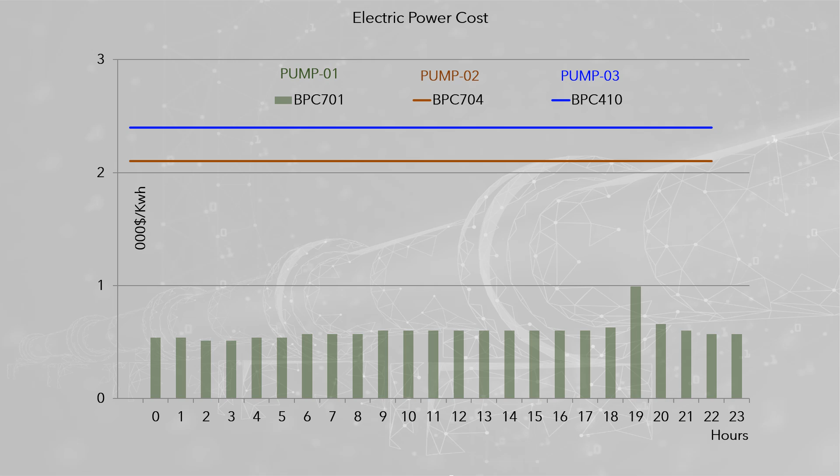The graph presents the costs of the energy used in pumping stations. Pumps 2 and 3 use fuel oil, pump 1 uses electricity. The electric power cost changes during the day, considering the hourly seasonality of energy demand.

As you can see, at 1900 hours there is a peak in the cost of electricity.

In the table, the hourly report that produces the model for each pumping station is presented. It is concluded that, due to the high cost of electricity shown in the previous graph, at 7 p.m. there is a pumping stop at the PS-01 station.

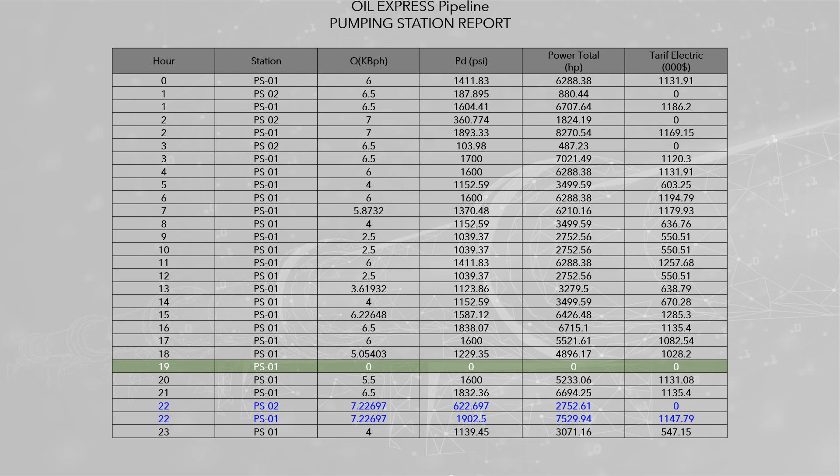The table presents the results for stations PS-01 and PS-02. The table presents the report by pump.

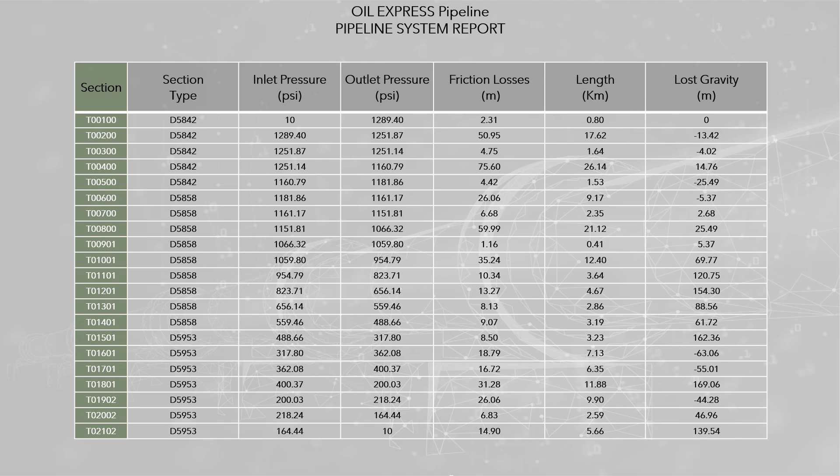The stop in the minimum energy consumption policy is due to the minimum pumping flow in the station, since, if possible, the optimal policy should be to maintain fixed the flow around 5 kbph. In the case of the minimum cost policy, fluctuations in flow are due to variations in electricity prices.

The minimum energy policy generates 16.21% of overcost, and the minimum cost policy generates 19.43% of overconsumption. As you can see, the differences are not negligible, and are a measure of the precision that mathematical models can provide when solving real-life problems.

Estimating this difference based on good practices and/or mental models is practically impossible.

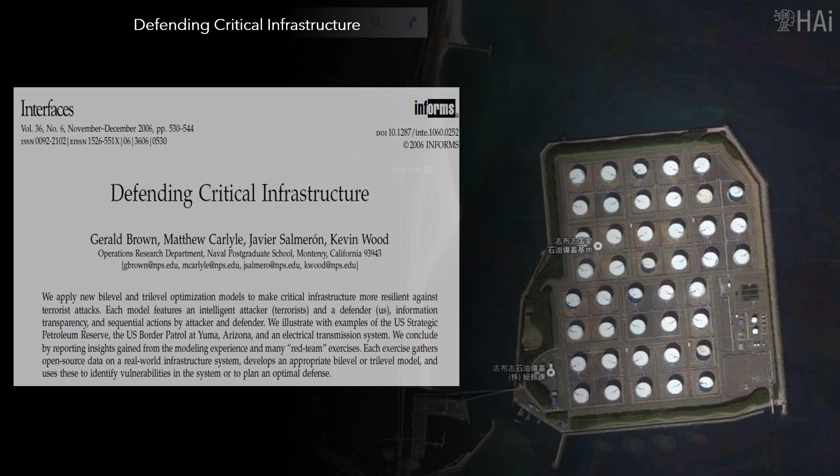Homeland Security case: Defending Critical Infrastructure. This section is based on the paper Defending Critical Infrastructure.

In 2002, the USA Department of Homeland Security deemed 13 infrastructure sectors that must be protected: agriculture, banking and finance, chemical industry, defense industrial base, emergency services, energy, food, government, information and telecommunications, postal and shipping, public health, transportation, and water. Critical infrastructure protection involves developing tools to anticipate, identify, and measure the risks to which a nation or region's critical infrastructure is exposed, in order to reduce the risks and consequences of an attack.

Bi-level and tri-level optimization models are used to make critical infrastructure more resilient against terrorist attacks. Each model features an intelligent attacker, terrorists, and a defender, us, with information transparency and sequential actions by attacker and defender. Three real examples are presented: the U.S. Strategic Petroleum Reserve, the U.S. Border Patrol at Yuma, Arizona, and an electrical transmission system.

Each exercise gathers open-source data on a real-world infrastructure system, develops an appropriate bi-level or tri-level model, and uses these to identify vulnerabilities in the system, or to plan an optimal defense. Only the first case is discussed in this presentation.

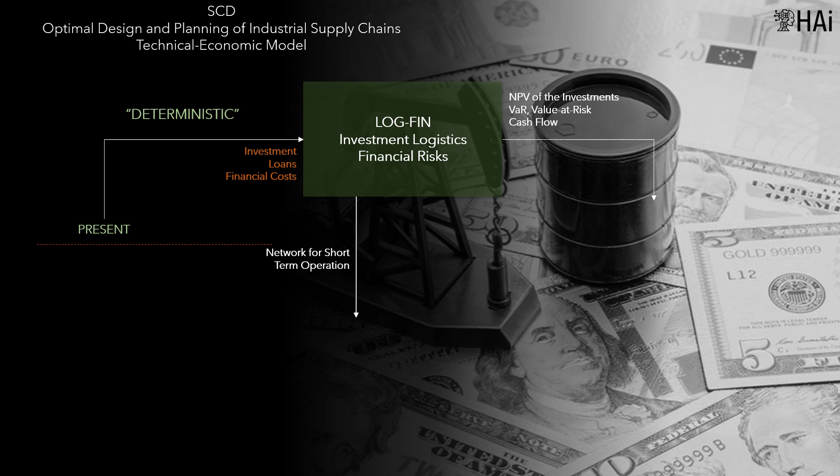The second model will be called SANDOP. It is aimed at simulating industrial operations, for each possible network proposed by the investment model, LogFin.

As input parameters it should consider, at least, the forecast of demand of final products, raw material supply, operational costs, and sell prices. The model can be extended to consider other aspects such as technological innovation, that affects the productivity of processes, new technologies which may affect market prices, and others that are considered convenient.

In general, all input parameters are uncertain, and it is appropriate to consider that this makes a stochastic programming model based on scenarios. This characteristic makes the LogFin model a coordinator of the evaluation of the scenarios to be considered in SandOp. It corresponds to a dynamic model that defines, for each period of the planning horizon, the industrial operations and the storages of materials.

In certain cases, it may not be necessary to consider product storage, because it may have little impact on investment costs, and additionally, it may be considered that its offer is always provided by the market with stable prices.

This is not the case for oil storage, where the market prices and the supply of oil and gas is uncertain with high volatility. The constraints of the model are related to the industrial production process.

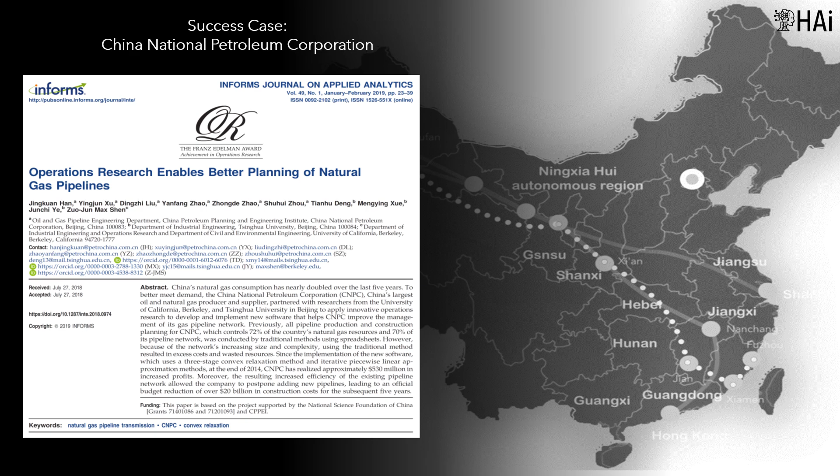Success case: China National Petroleum Corporation. The paper 'Operations Research Enables Better Planning of Natural Gas' presents the use of mathematical optimization models for pipeline planning. China's natural gas consumption has nearly doubled in the past 5 years.

To better meet demand, the China National Petroleum Corporation, CNPC, China's largest producer and supplier of oil and natural gas, partnered with researchers from the University of California in Berkeley and Tsinghua University in Beijing to apply operations research to develop and implement new software to help CNPC improve the management of its pipeline network.

Previously, all pipeline production and construction planning for CNPC, which controls 72% of the country's natural gas resources and 70% of its pipeline network, was done by traditional methods using spreadsheets. However, due to the increasing size and complexity of the network, the use of the traditional method resulted in excessive costs and wasted resources.

Since implementing the new software, which uses a 3-stage convex relaxation method and iterative piecewise linear approximation methods, in late 2014, CNPC has obtained approximately $530 million American dollars in increased earnings, 2015 to 2017.

In addition, the resulting increase in the efficiency of the existing pipeline network allowed the company to postpone the addition of new pipes, leading to an official budget reduction of more than $20 billion American dollars in construction costs for the following 5 years.